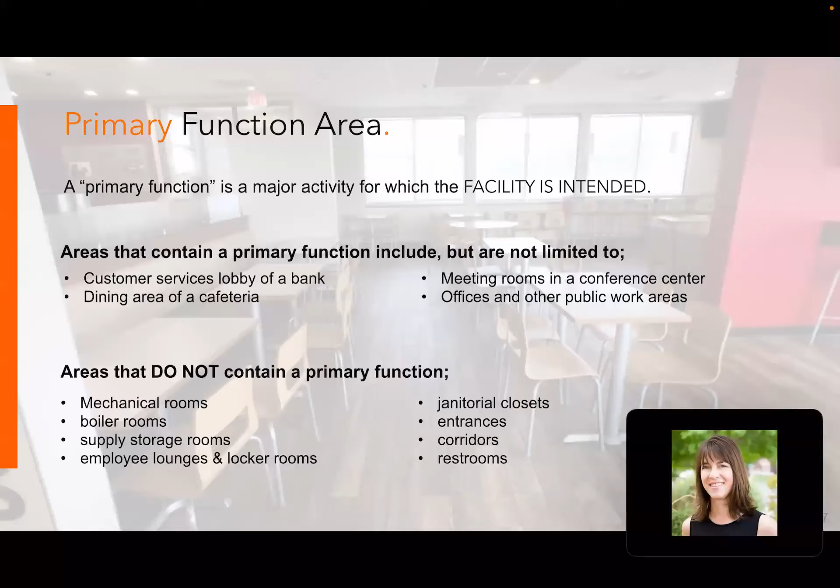So where does this kind of help come in? Path of travel or restrooms. What the standards tell us is that the path of travel to the altered area and restrooms, telephones, drinking fountains, etc., have to be brought into compliance in an alteration. But it's path of travel to the altered area and the restrooms.

But does that include the restrooms? Well, according to the Department of Justice, it does. So if you're doing an alteration to a space, you have to bring the path of travel to that altered area into compliance, as well as the restrooms that service that area.

But let's talk about a two-story department store, and we're doing alterations on the second floor. So we're required to bring the toilets into compliance that serve that area. If we've got toilets on the second floor, those are going to have to be brought into compliance, but maybe not the first floor restrooms because they service the first floor. So that's kind of the difference that we're looking at when we're talking about restrooms and path of travel to altered areas of a primary function area. Again, this all goes back to primary function area.

So what are we talking about here? The path of travel to the altered primary function area. That's going to first start at a bus stop, at the public right-of-way, at accessible parking spaces, to the entry to the building. So that's number one. Number two is the entry to the building. Number three, once we're in the building, that's going to be the path of travel to the primary function area that's altered, and then the toilet rooms that service that altered primary function area. So this is kind of an example of the order that we're going to apply those standards to.

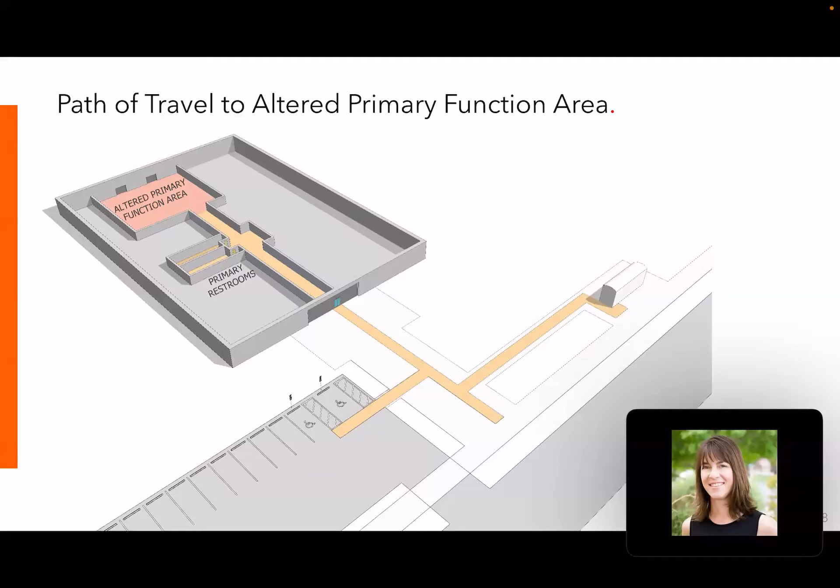So what is readily achievable? Readily achievable is easily accomplishable and able to be carried out without much difficulty or expense. So in determining whether something is readily achievable or not, we have a series of factors that we have to look at. But the Department of Justice threw one at us, which is the overall financial resources of any parent corporation or entity. So whereas a mom and pop store may not be able to afford to do something that would make it not readily achievable, a corporation like Walmart literally has the resources to tear a building down and build it back from the ground up. Not a good business decision, but as far as the financial resources, they have that.

So for a large corporation, readily achievable is a very high standard to meet, whereas a mom and pop have a very low standard to meet something that's not readily achievable. But the thing that somebody needs to keep in mind, if you can't afford to fix it, what makes you think you can afford the lawsuit? Because those lawsuits are going to come anyway. And even though it might cost $3,500 to tear out a curb ramp, and it's determined to not be readily achievable, it's probably going to cost you that plus much more to defend against that lawsuit. So that's something that owners need to keep in mind when they're taking a look at readily achievable.

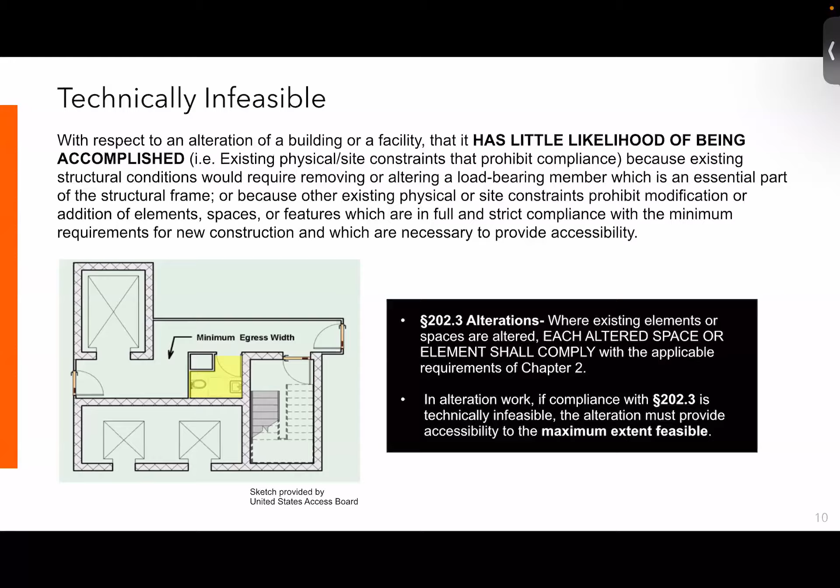And then alterations. We've kind of gone through this. All of these are alterations and how you apply the standards to alterations. But what is an alteration? I think as architects, we have a definition that we use as an alteration, but it's not necessarily what the ADA says an alteration is. An alteration under the ADA is something that affects or could affect the usability of the building, facility, or space.

So that could be changing out the flooring in a space, changing from carpet to a wood floor or wood floor to a carpet. That changes the usability of a space to a person with a disability because a person who uses a wheelchair has a harder time rolling across carpet than they do a hard surface floor. So that's the kind of usability that the ADA is talking about, not necessarily changing it from a conference room to an office or something like that.

So again, activities that could affect the usability: carpet, changing tile floor to carpet, changing out a water closet or a sink, restriping a parking lot could affect the usability. But what they're talking about when we're talking about restriping a parking lot is not necessarily the maintenance that you do to repaint the existing parking lines. This would be where maybe you've had to resurface the parking lot and you're relaying out the parking spaces. That is restriping a parking lot at that point in time.

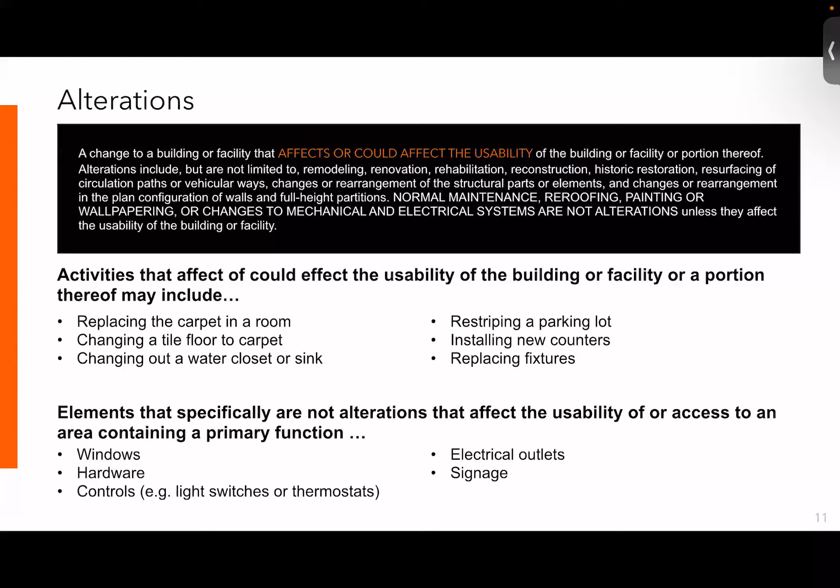And again, primary function area. We went through that a little bit more. So again, primary function area, what the facility is intended for, you have to make that analysis and determine whether something is a primary function area when you're doing an alteration for it. My advice would be always to err on the side of caution and look at it as a primary function area, but that's up to the owner to make that determination. It's up to the architect to help the owner make that determination.

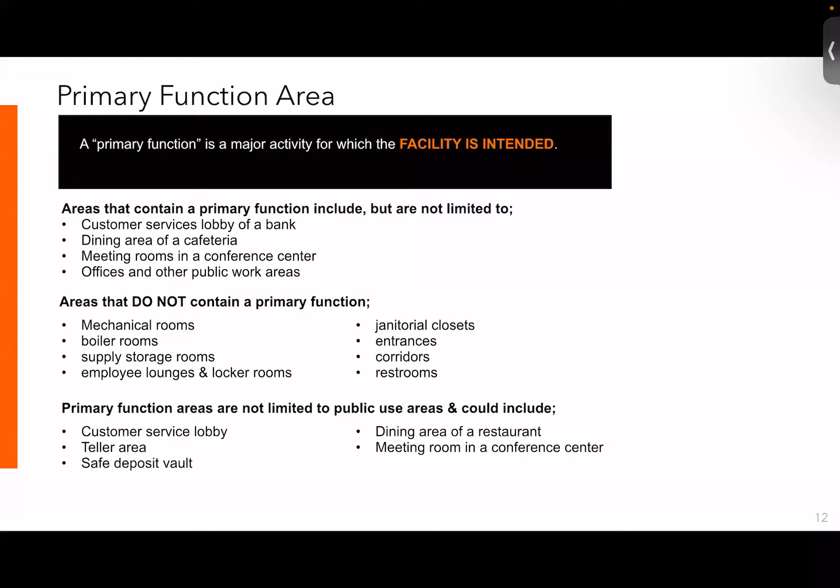So the next thing we want to talk about is disproportionality. So there's a concept in the ADA talking about when we're doing a renovation to a primary function area, we have to bring the path of travel to that primary function area into compliance, but only to the extent that the cost does not exceed 20% of the overall alteration to the primary function area.

So let's say we're going to do a $100,000 renovation. Let me get back to where we were there. Let's say we're going to do a $100,000 renovation. What this means is that we may have to spend an additional $20,000. So our total renovation cost is $120,000 to bring the primary path of travel and the toilet rooms into compliance as part of this renovation. What this means is that once you reach that 20% threshold as part of that renovation, you can stop.

However, that does not mean you do not have a continuing barrier removal obligation, that tomorrow you don't still need to remove barriers. So it's kind of a give and take area where, yeah, I can stop, but I still have a barrier removal obligation. So you may want to consider the fact that it may be less expensive to go above that 20% and do it now than to wait and get caught in a lawsuit later because you've got a barrier and you haven't removed that barrier.

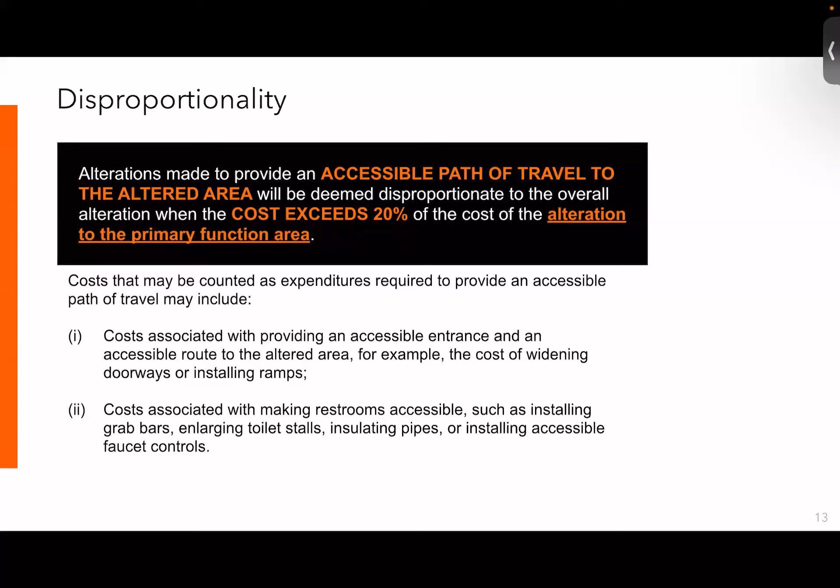So now some really meaty stuff here. Accessible routes. Let's get right down into the nitty-gritty of what the ADA requires. So where are accessible routes required? Site arrival points, at least one. We talked a little bit: public streets, transportation stops, accessible parking, accessible passenger loading zones. Within a site, between buildings on a site, electric vehicle charging stations on the site to the building, those are all places where accessible routes are required. And again, at least one.

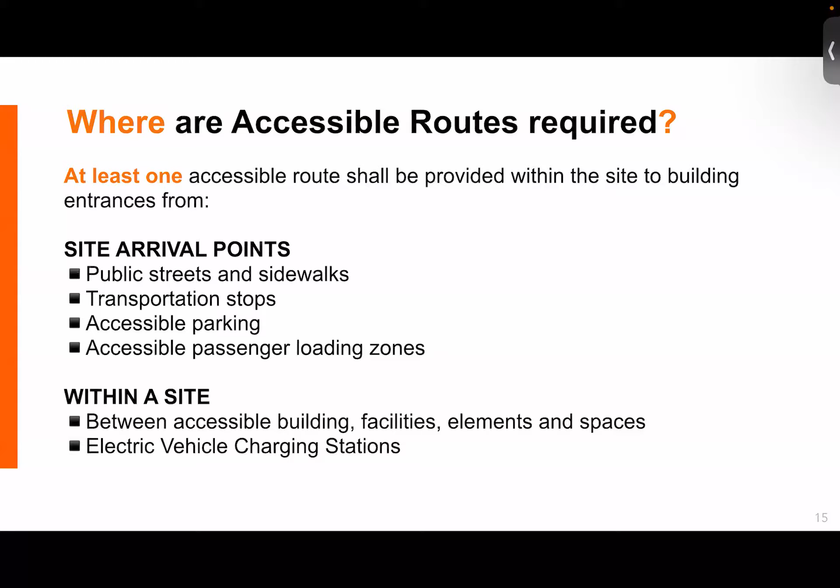And I cannot tell you how many new buildings that we are continuing to see built today where there is no accessible route provided from the accessible entrance to the public right-of-way. And there's actually two reasons why that is required, because the building code also requires that you have an accessible route as part of the exiting system from the building to the public right-of-way. Within a building, multi-story buildings.

Each story of a building has to be on an accessible route. But we do have an exception when the building is less than 3 stories. This is known as the elevator exemption. So as long as 3,000 square feet per story also. So buildings that are less than 3 stories, or buildings that have less than 3,000 square feet per story are not required to have accessible routes to all of the different stories.

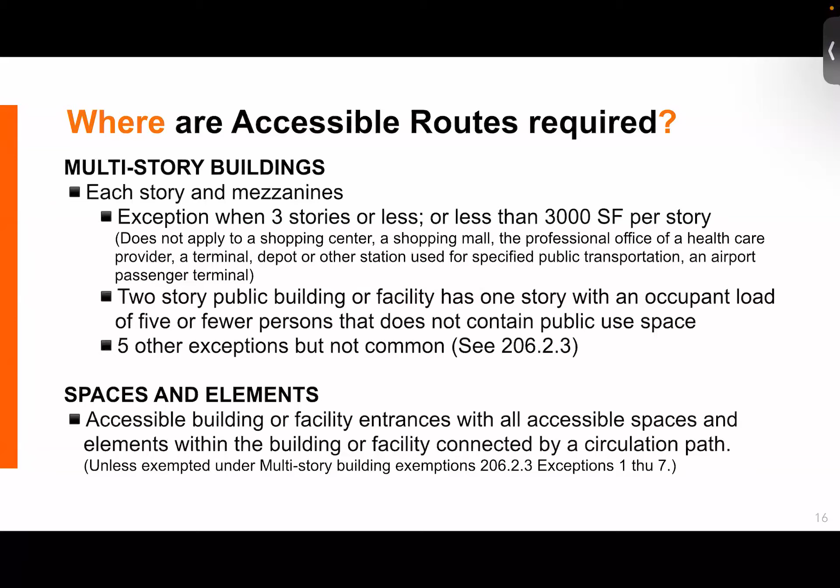And then spaces and elements within the building. Entrances to all accessible spaces have to be connected by a circulation path and an accessible route. And again, we go back to the multi-story building exemptions where that might not be a requirement. Employee work areas. Well, under the ADA, common use circulation paths within employee work areas are required to be accessible, but there are exceptions.

Employee work areas that are less than 1,000 square feet. Common use circulation paths that are an integral component of work area equipment. And then common use circulation paths within exterior employee work areas. So those are the exceptions. Otherwise, you need to make your common use circulation paths within employee work areas accessible.

And then emergency exits, as I mentioned earlier, from the exit discharge to the public right-of-way is a requirement because the ADA references back to the International Building Code, and in Chapter 10 of the International Building Code, that's a requirement. And then again, others in 206.2, not so common that we deal with all the time, but make sure that you pay attention to those.

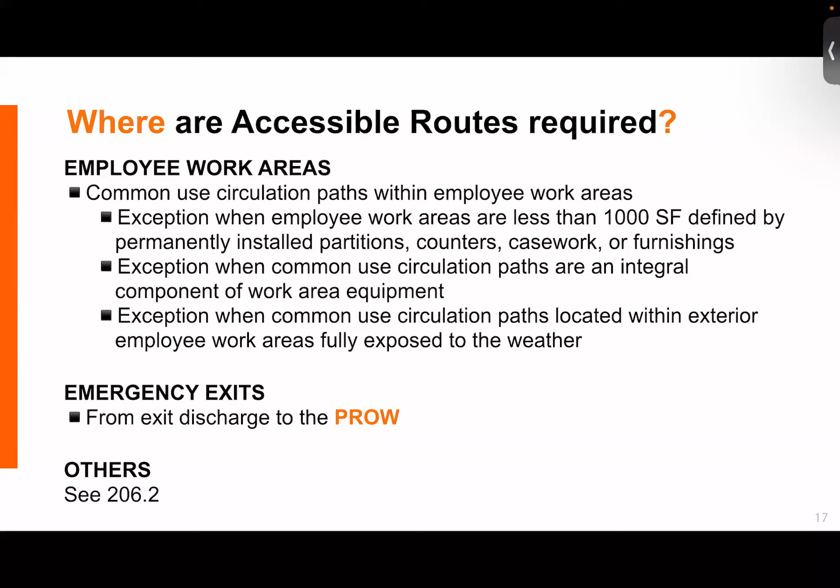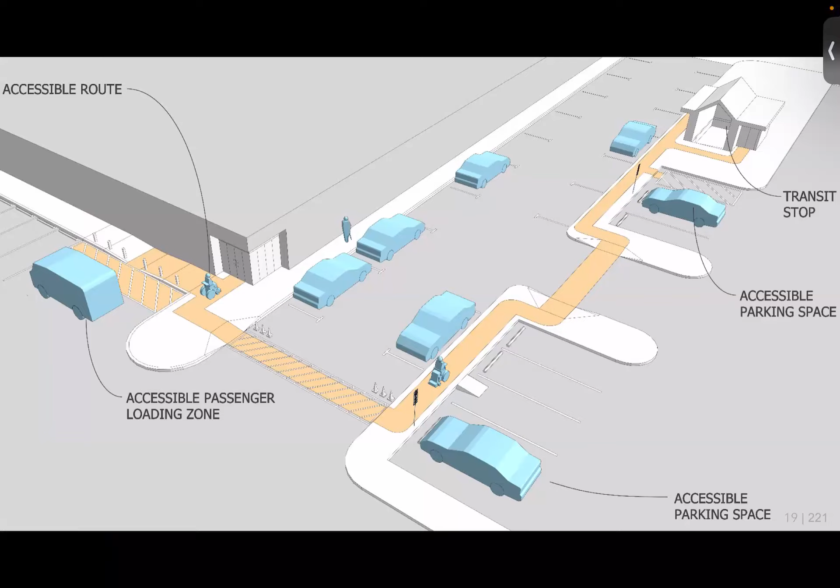But too often we see people trying to utilize this exception from a place that clearly could have pedestrian traffic. So it's best not to try to use it because it's a rare exception. So accessible routes, again, transit stops, accessible parking spaces, again, passenger loading zones to the building. And what's interesting is if you take a look at this sketch that is part of the Access Board's information, you will see that there are several things there that probably don't work, like the failure up near the transit stop. There's no curb ramp, so that parking space is actually not on an accessible route.

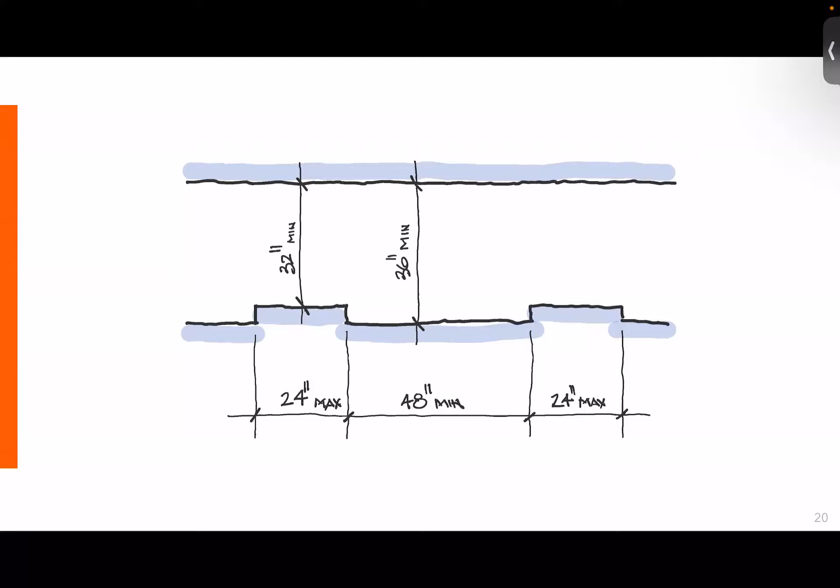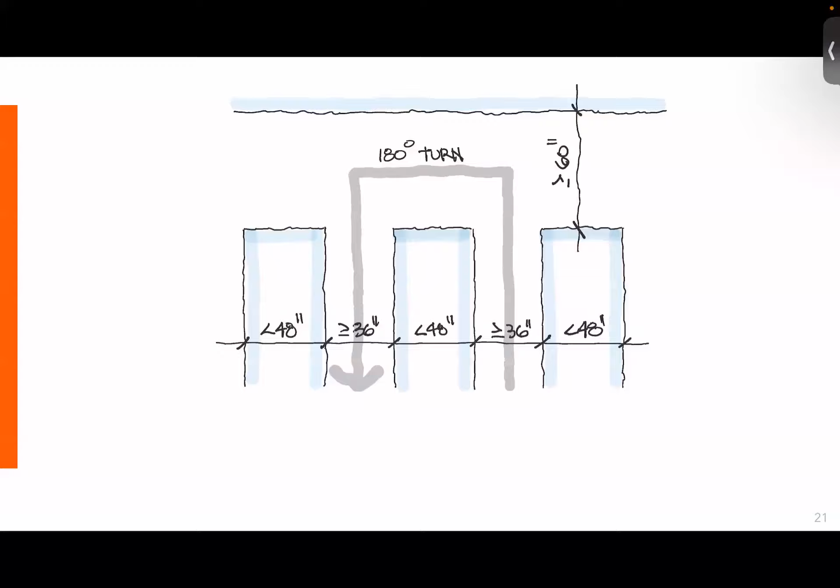So what is an accessible route? An accessible route is 36 inches minimum, with the exception that it can go down to 32 inches minimum for 24 inches max, as long as those reductions are at least 48 inches minimum apart. We also have 180-degree turns within an accessible route. So again, we have several options there. If the object that you're doing the turnaround is less than 48 inches, your accessible route has to be greater than 36 inches in width, as long as your turn itself is greater than 60. Or if it's less than 60 but greater than 48, then you have to have 42 inches.

But the question is, this kind of looks like something you might see in a retail store where you're going around the retail shelving. Is that a 180-degree turn? No, in our opinion, it is not. A 180-degree turn is where you are forced to make the 180-degree turn. In a retail store, we would not consider that to be a 180-degree turn because you can actually go the other direction. So it's really two 90-degree turns because you have maneuvering space where you can maneuver back and forth and then make the turn.

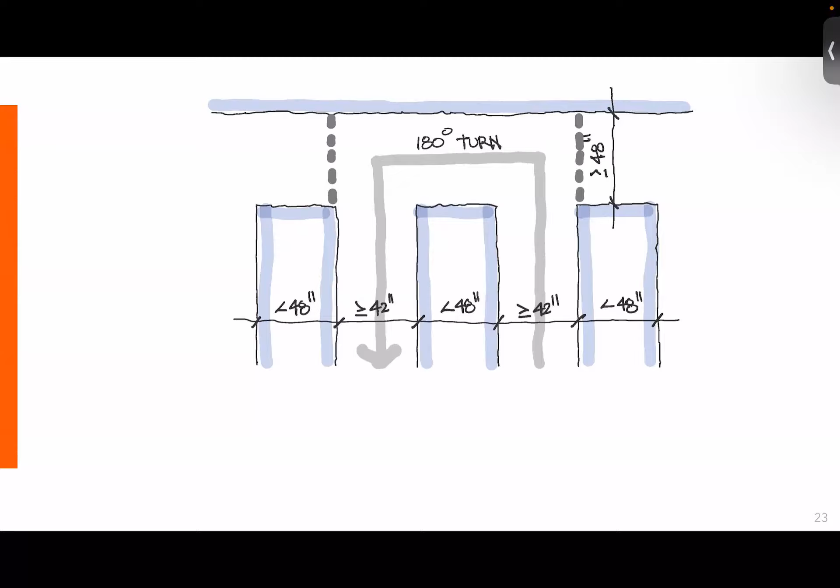So one last attempt at where are we going to have accessible routes. We're going to have them from public streets and sidewalks. So keep in mind, just because you don't have a sidewalk out in the public right of way does not mean you do not have to have an accessible route to the building. It says public streets and sidewalks. From the accessible parking spaces.

Now here's one. What about to the dumpster area? My opinion is that an accessible route to the dumpster area is not required. But the Department of Justice is on record as saying that they expect to see an accessible route to the dumpster area. So therefore, our recommendation is provide it. It probably doesn't cost anything to provide it as part of the construction of a new building. But if you get caught later, it can be extremely expensive to try to install that later.

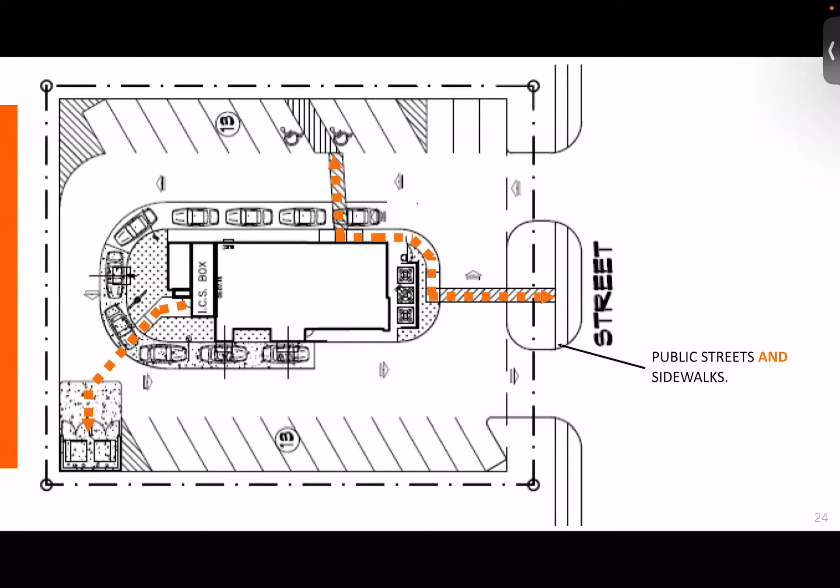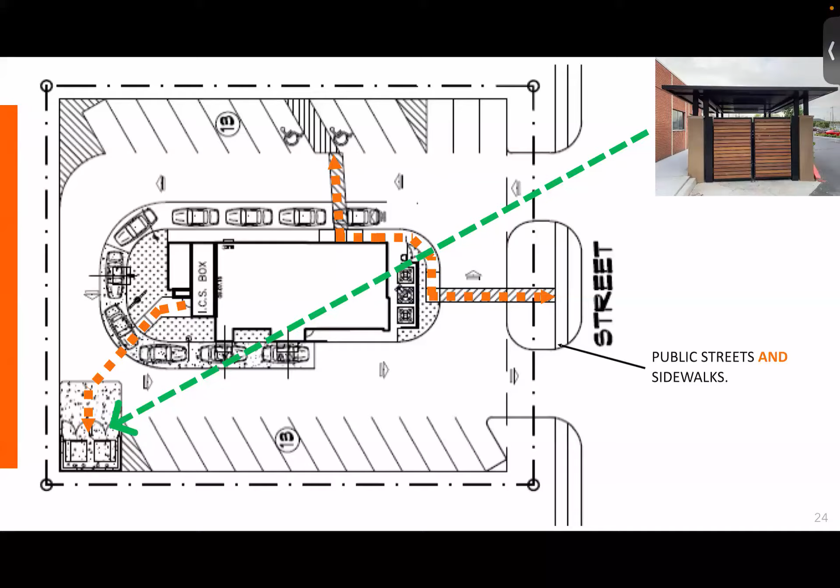And that is only an accessible route to the dumpster area. It doesn't mean that the dumpster area, the gates to the dumpster area, have to be accessible. You just have to have an accessible route out to that area. And here is the exception where an accessible route is definitely required to the dumpster area: when it has a covering over it, which we see some places, which is an attempt to keep water out of the dumpster area so that it doesn't take garbage and stuff carried out when it rains.

And as a matter of fact, there have been some studies that show marking those in drive aisles causes more people to be hit, not less. So the question is, does the paint protect people or not? And I guess the idea is that paint probably makes people think, oh, I've got a clear path here, I'm protected, when in reality they are not.

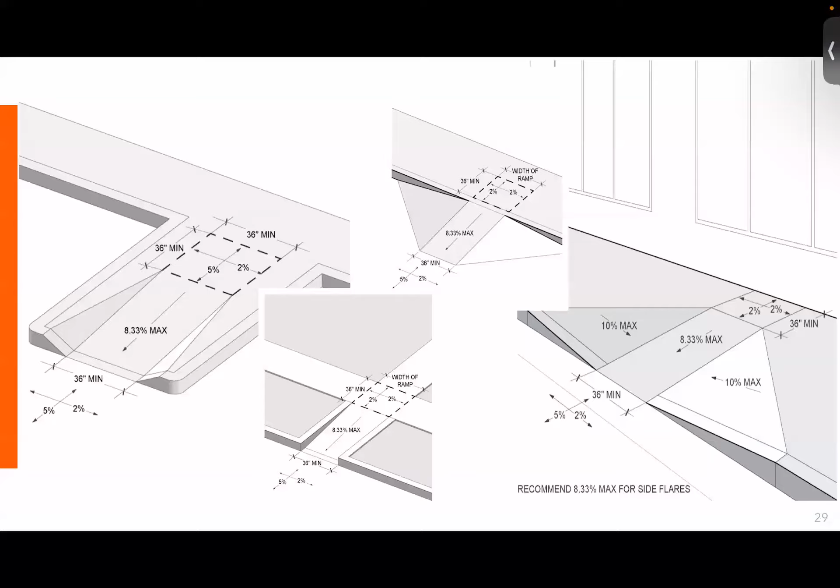Now we get into a curb ramp. There are lots of different things that make up a curb ramp. We won't go through all the different layouts of a curb ramp, but something we want to talk about is side flares. Under the ADA, side flares are not required on curb ramps unless a pedestrian can walk across the curb ramp. So in the second picture there on the bottom, obviously a pedestrian would not walk across that curb ramp, so side flares are not required. The one on the right, where it is in the middle of a sidewalk, pedestrians could walk across that, so therefore side flares would be required.

And again, we have opportunities to do curb ramps that are built up, built in. We can also have parallel curb ramps like the one in the upper portion there. Those are legitimate curb ramps as well. And those may be better in a lot of cases. So you can still use those. You just have to remember that you have to have a clear landing at the bottom that's level, and you have to have landings on the tops of the curb ramps that are level as well.

And the one on the far right we point out because oftentimes what we see is that the ramp will extend all the way down to that curved area. Well, the problem that you've got is that grade breaks at curb ramps need to be perpendicular to the path of travel. So you're going to have to break that curb ramp at that bottom edge and then have a level area out there that takes in that curb.

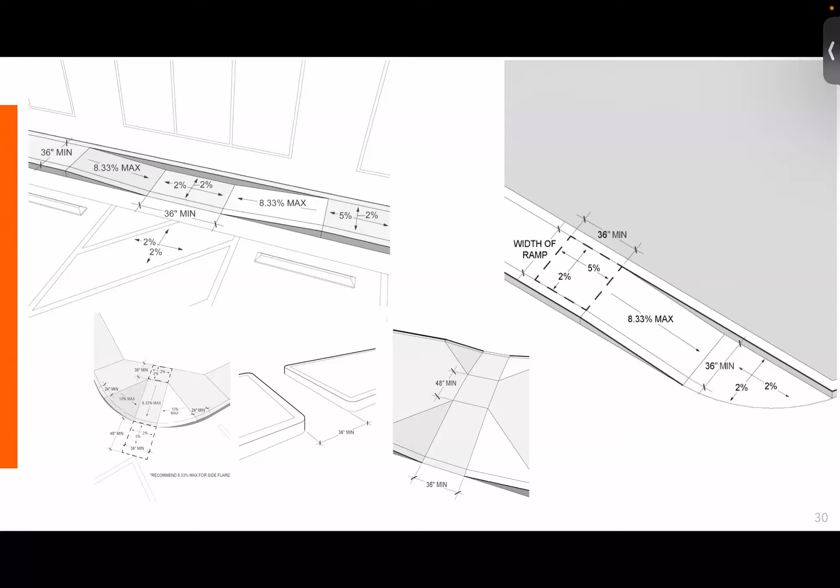So why do we see so many curb ramps that are too steep, not compliant? Are we as architects stupid and we design them wrong? I don't think so. Are contractors just bad at getting them built correctly? I don't think so. But we tend to think that we have a 6-inch curb, so a curb ramp has to be 6 feet minimum in length.

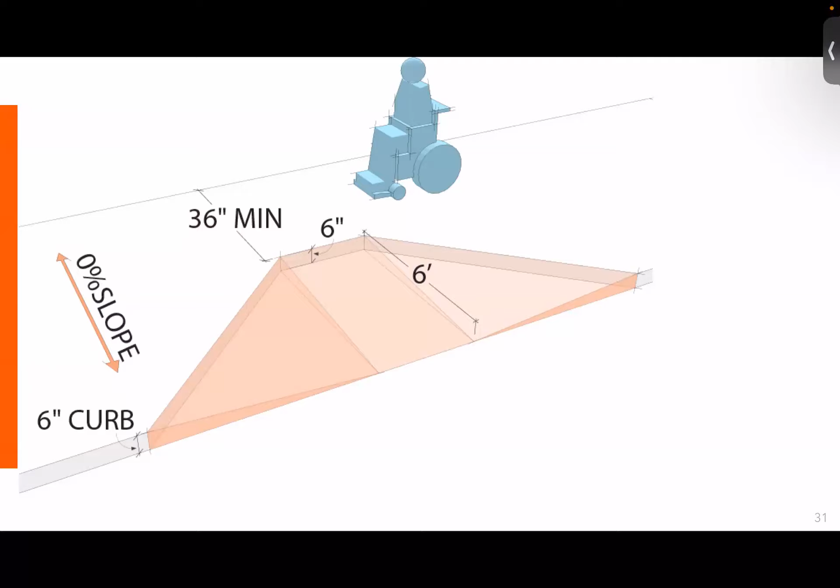That's great, as long as we have a 0% slope that we're building that in. But what in reality we usually have is a slope along that sidewalk of 2%, let's say. And if it's a 2% slope, we're actually chasing grade. So that curb ramp has to be almost 8 feet in length to maintain a 1 in 12 maximum slope. And then think about that 36-inch minimum that you have to have across the top of it there. Now that sidewalk has to be almost 11 feet in depth.

That is where I think most of the problems are caused, because the contractor goes out and builds a 6-foot curb ramp, but he matches it to the slope of the sidewalk, the cross slope of the sidewalk up there, and we end up with a curb ramp that therefore is too steep. This is just something that we're not properly considering, because it doesn't show up on a piece of paper well.

So Brad, we have a question. Yes. It says, are truncated domes required in curb ramps? We're going to talk about detectable warnings there. Under the ADA, detectable warnings are not required on private property, with the exception of train boarding platforms. That is the only place under the ADA that detectable warnings are required.

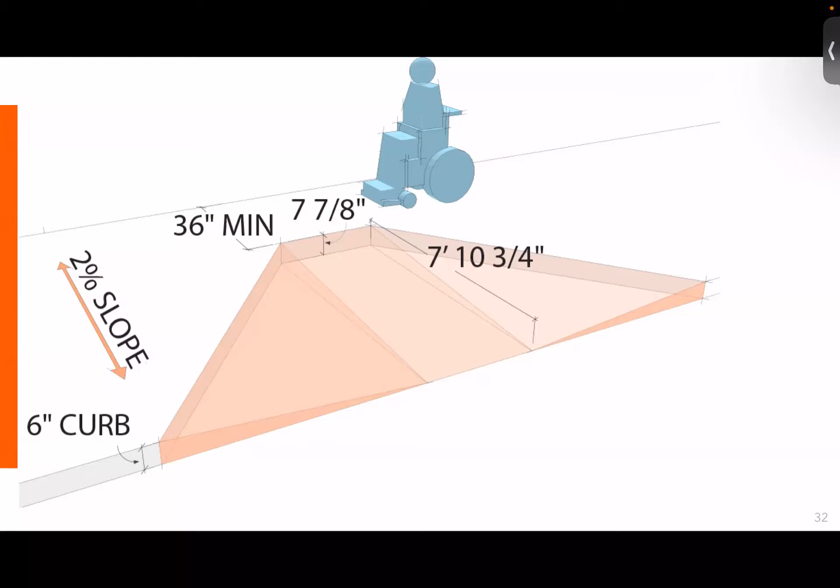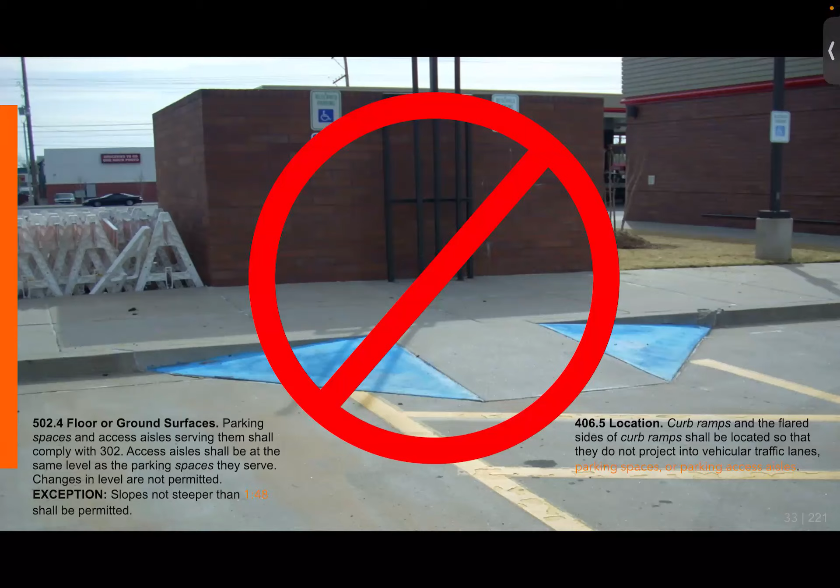So what's wrong with this curb ramp? It looks like it's sloped right. It's got side flares that look like they're okay, but this curb ramp is not compliant. Why is that? Well, there's actually two reasons. The first reason is that the ground surface of the access aisle and the parking spaces is required to be 2.1% max, 1 in 48. Once we put that curb ramp and those side flares in there, which extends into the parking space and the access aisle, is that not greater than 1 in 48?

Therefore, it's not compliant. The second reason is that it specifically states that curb ramps and flared sides of curb ramps shall be located such that they do not project into vehicular traffic lanes or parking spaces or parking access aisles. But we still see this being built today because we're missing those two reasons right there. So don't do this anymore.

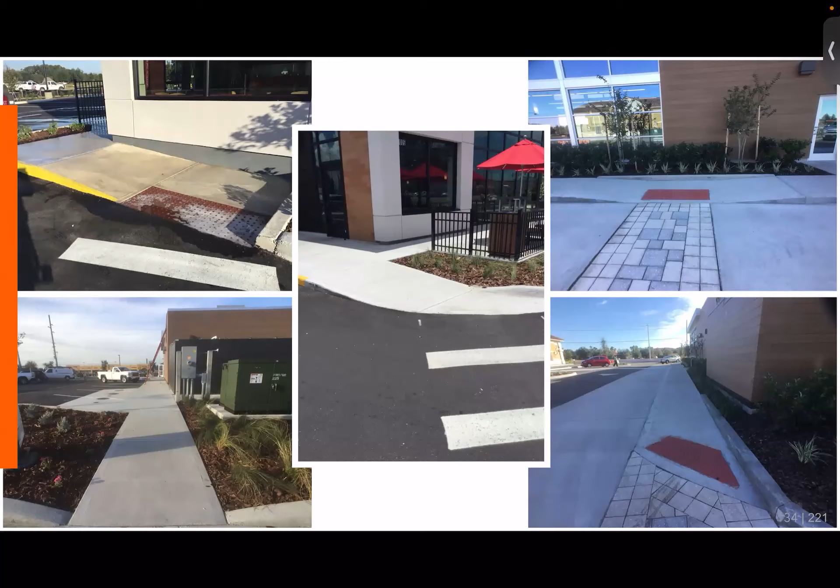So let's take a look at some examples of some curb ramps, some good, some bad. And as you can tell, these are being provided with detectable warnings, but it was not required, but they're still being placed there. So I would encourage people to think about that and not over install detectable warnings. They're maintenance issues. They can then become trip and fall hazards, which are much more expensive than ADA lawsuits. So that's something that we want to avoid.

Okay, so we see that picture in the middle. That is a pretty good example of how you put a curb ramp in, you do the grade break right there, and then you have that level surface at the bottom that's outside of the drive aisle. The one on the bottom right is a really bad example, because it doesn't have the level area at the bottom. The upper left is kind of a half parallel curb ramp. That's perfectly acceptable. The one in the upper right is a parallel curb ramp, but again, detectable warnings are not required.

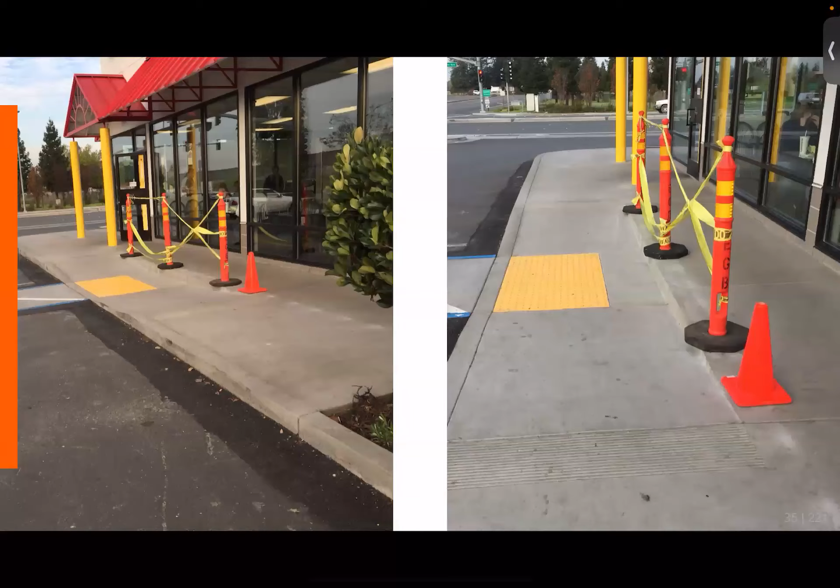Here's an example of a curb ramp. This one actually is in California, so the detectable warning was required in California. Everything is compliant, but it's a bad design. And I think we can see that there was a definite problem there because they put these warning cones up there.

One of two things happened here: a person walking down the sidewalk didn't catch the fact that you had that break in the grade there, and they twisted their ankle, or somebody walking across the crosswalk right there didn't see the step and tripped and went headfirst into the glass. We've seen this a lot, and then we've seen the solution trying to come back after the fact.

So we need to pay attention to safety aspects as well, even though the ADA itself is not necessarily a safety code. There are some things that we as architects need to pay attention to. So ramps, we talked about curb ramps, we talked about ramps. There is a very definite distinction between curb ramps and ramps. Curb ramps in no situations require handrails.

Ramps could require handrails. If the rise of a ramp is greater than 6 inches, you have to have handrails. Curb ramps could have a rise of 24 inches, and it doesn't require a handrail. So what is a curb ramp versus what is a ramp? A curb ramp is a ramp that cuts through a curb. A ramp does not cut through a curb. It's just that simple.

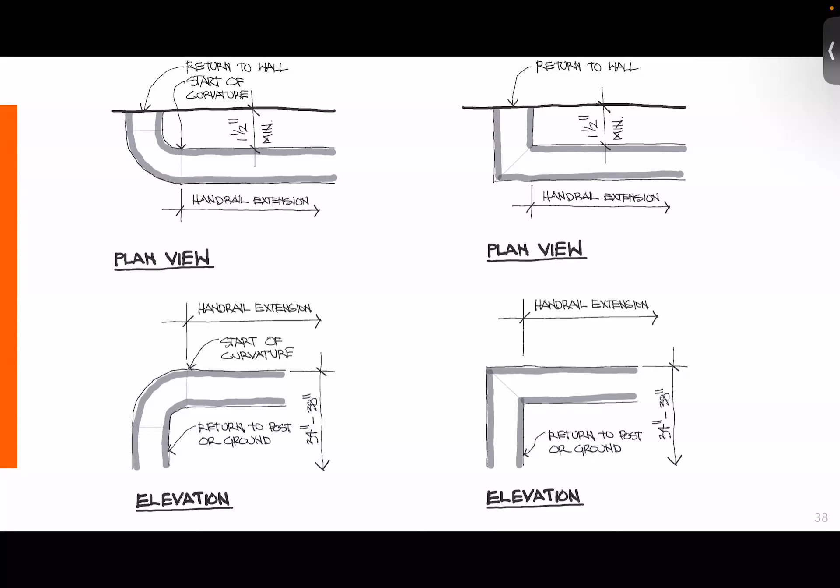So that actually makes that extension more than 12 inches in total length because of where you start measuring it from. And that's something that we see as a violation a lot. This is getting missed over and over and over again. So hopefully that might clue us in a little bit about when you're talking about whether it floated or not. It does have to return to a wall, the ground, or a post. And here is an example of both of these returning back to a post, and you're seeing that curved surface of where you're going to start measuring from.

So let's move on to doors here real quick. I'm not going to go through all the different variations of door approaches. You're going to have to look those up, but just keep in mind that there are variations, and you need to pay attention to how you approach the door. If you can get a forward approach or a front approach to that door, I might advise that you look at that, because a person who uses a wheelchair would most likely prefer a forward approach because it's much easier to use the door.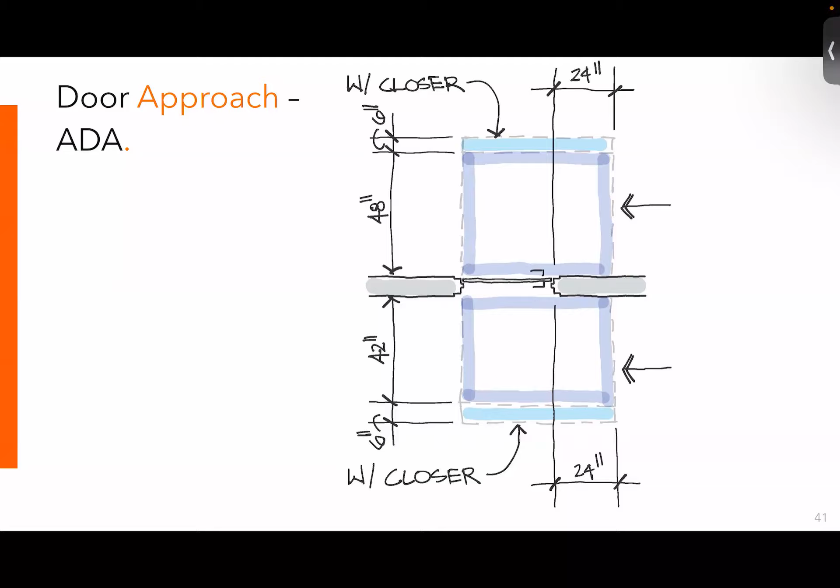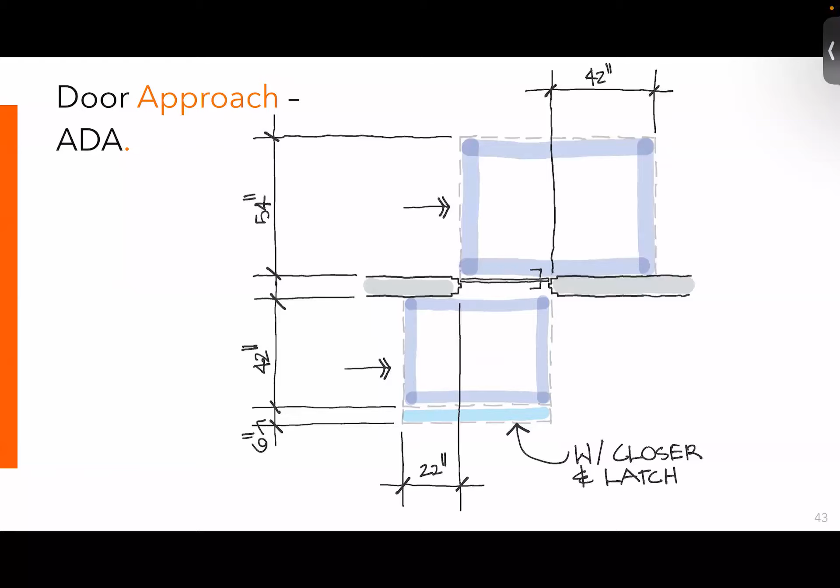But you might also want to think about using the predominant approach to that door. Is it a forward approach, a latch approach, or a hinge approach? That's a designer's choice. And you only have to have it from one side, not both sides or all three, but choose the predominant side. But again, with closers, without closers, changes the depth and the width; whether it's interior or exterior can change it as well for the latch side approach. Just keep in mind that you have different variations of that theme.

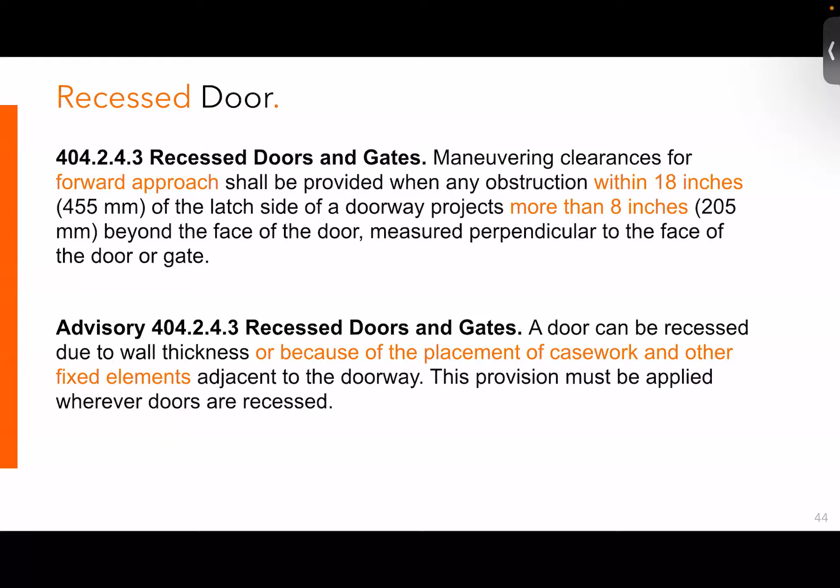The thing that we see missed a lot is recessed doors. So a recessed door or gate is required to have a forward approach if there's an obstruction within 18 inches that's more than 8 inches in depth. And you need to be paying attention, because casework or other fixed elements can also create a recessed door situation. So here's some examples of a recessed door.

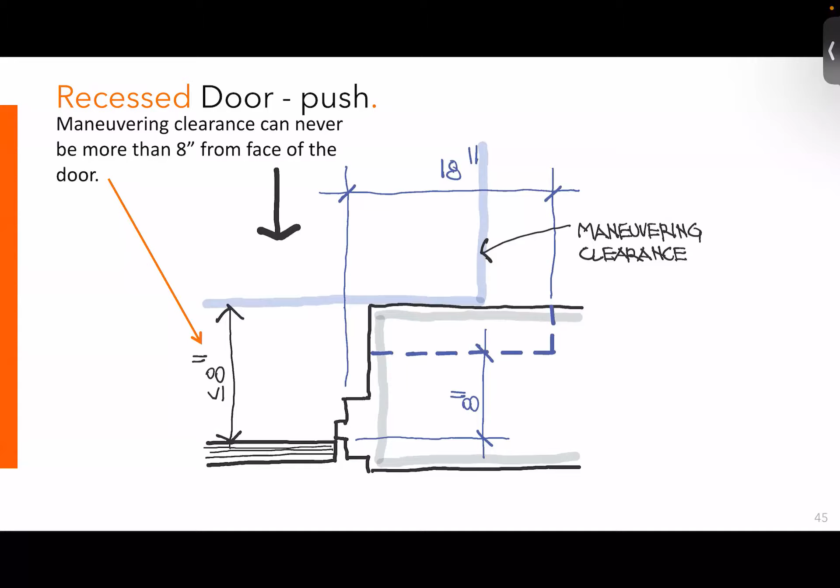And the best example that I can use is that if you determined what the door maneuvering clearance is, and it is greater than 8 inches from the face of the door because of some wall condition or fixture condition, then you've got a violation, period. That door maneuvering clearance needs to always be 8 inches or less from the face of the door. And if you can meet that condition, you really don't need to worry about recessed doors, with the exception of whether it's a forward approach or not.

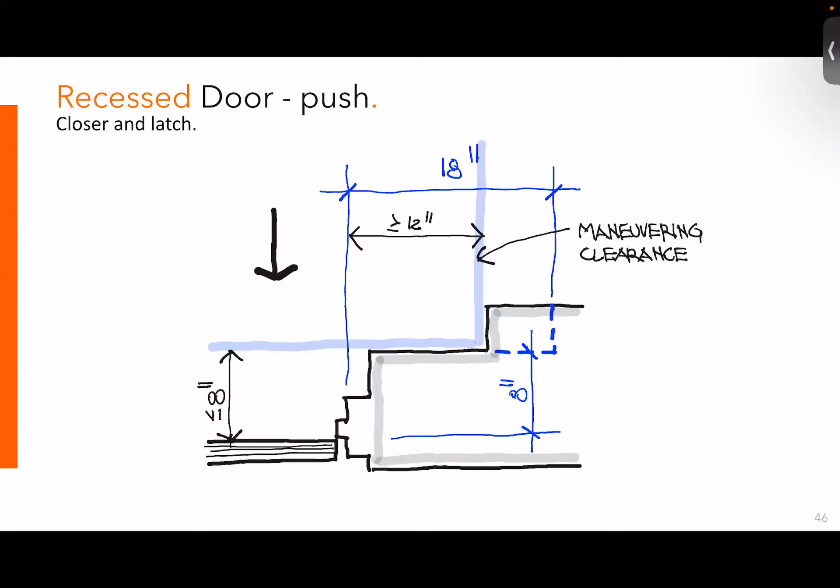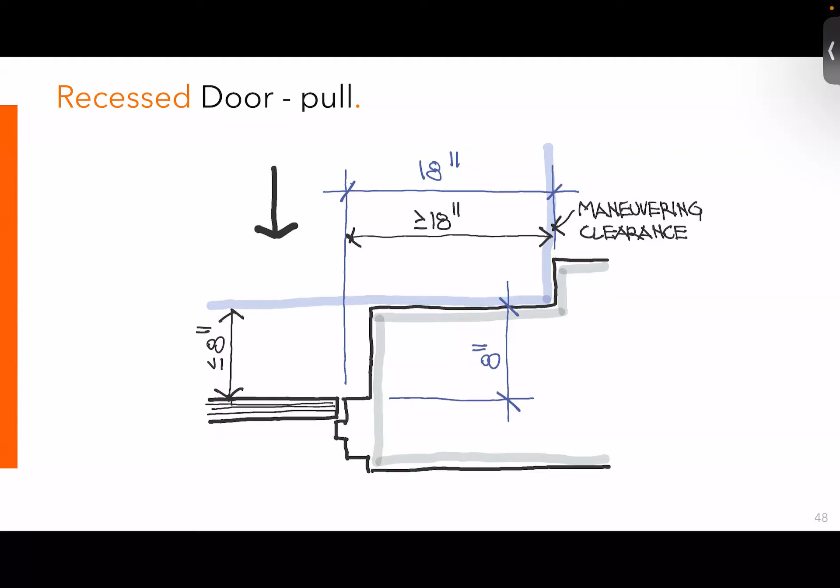So how do you fix it? You notch the wall. That's what we're talking about. Make sure that's always 8 inches or less. So then your maneuvering clearance will always be compliant and you don't have to worry about it. And pull side, push side, same thing. Just keep those all in mind. Maneuvering clearance, again, less than or equal to 8 inches. Then you don't have to try to determine whether it's a recessed door or not. It's just going to comply because you've got the proper maneuvering clearance at that door.

More examples. And then we talked about items that can create recessed door conditions, like a fire extinguisher, alarm pads on doors. Technically, a light switch could create that condition because that light switch sticks out a quarter of an inch. Luckily, everybody has some common sense, and we don't worry about light switches. But highly technically, it could create a recessed door condition.

Brad, we have a question. Yes. It says, if there is not a jamb, so the door swings either way, do the same rules apply? So we're talking about a double swing door here.

People would prefer a push door than a pull door because, again, they're usually much easier to use. So we always look at a double acting door as a push door. And so therefore it only has to meet one condition. It does not have to meet both the push and the pull. So we just look at it as a push door and have it comply with the push door condition.

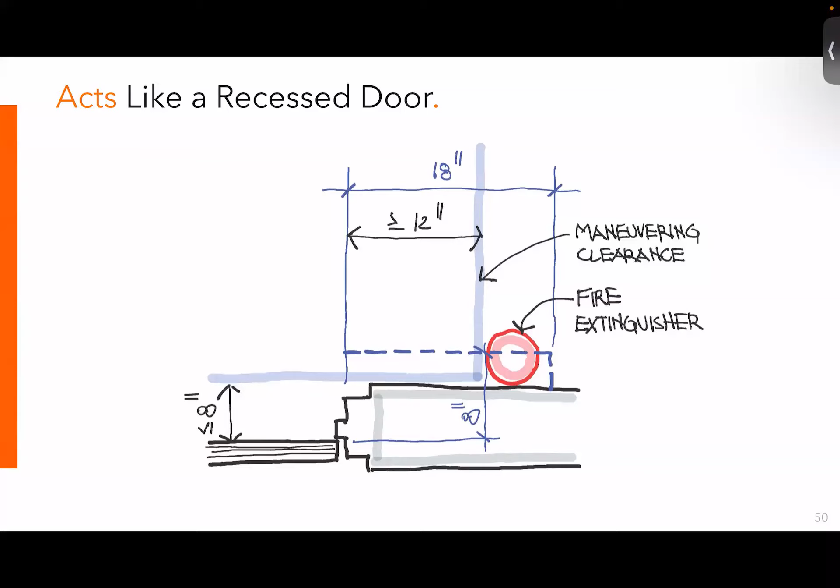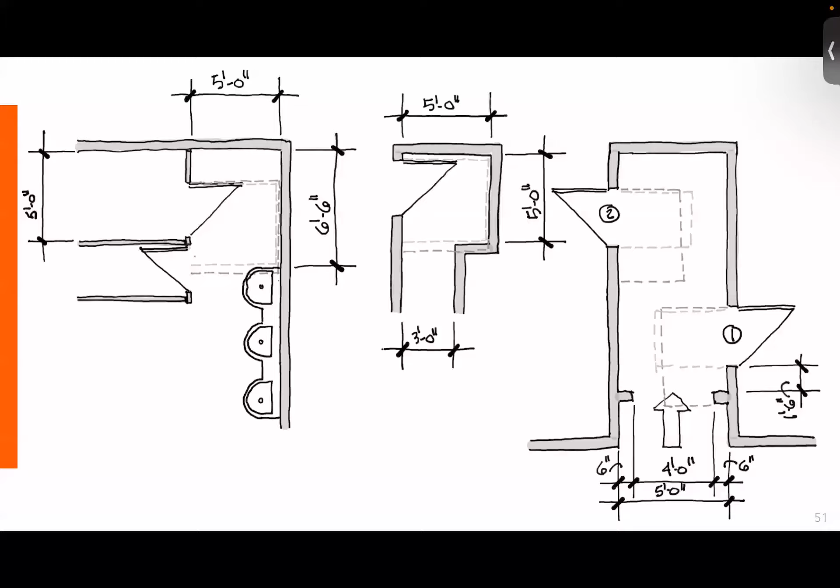And where that happens a lot is at toilet room doors where people want to use the towels to open the door, so they don't have to actually touch the door handle. So we have owners who actually put them there. Maybe as architects, we can design a solution so that doesn't become a problem there.

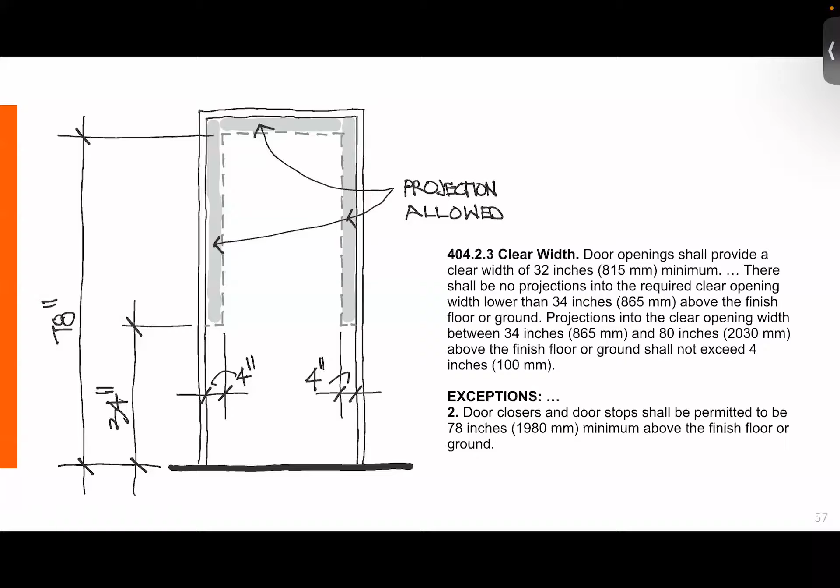And we have seen a lot of complaints over door closers and door stops, but this is the way that you defend against those complaints. Doors, and sorry, Brad, we have another question.

What is your opinion on having a recessed door in a historic renovation project where it is infeasible to meet code without damaging the historic structure? Punt. There are exceptions for historic buildings that you do not necessarily have to provide accessibility at that particular location if it is going to destroy the historic nature of the building or that element.

So that's something that you work with the historic preservation committee that's overseeing the historic aspects of the building as to what exactly you do. A lot of courthouses are historic courthouses. And so you end up putting the accessible route into that courthouse at the rear of the building so it doesn't destroy the historic nature of the front of the courthouse. So those are the kind of things that you do. You move it to a different location.

The other thing that we see a lot is automatic door openers used. There's a concept called equivalent facilitation. The idea is to provide the greatest amount of access possible. Automatic door openers and operators are not required in the standard, though a lot of people think they are. They do help get around requirements such as door opening force and maneuvering space clearances, because you just don't require the clearances if you have those type of elements.

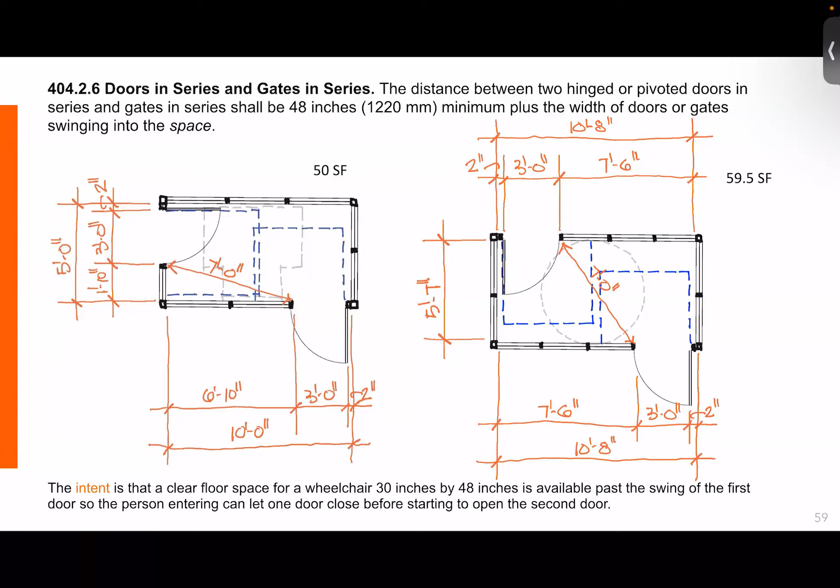So if we look at the left-hand vestibule, we could make a claim that that 7 feet is what is required right there, because now we have a 36-inch door plus 48 inches between the doors. We could look at the one on the right and same thing. We have a 7-foot distance there. I don't think that that is the proper way to do that, even though that's exactly what the language does say. I think this is the way we want to look at it.

If we have doors that are in alignment with each other, we open the door and then we have 48 inches. That makes the vestibule 7 feet in depth. If they're not in alignment with each other, we make sure that the door swing is 48 inches from the other door. So what we're actually doing is we're measuring the 7 feet from the hinge side of the door, not the latch side of the door. This is what we do, and this is how we check for enforcement.

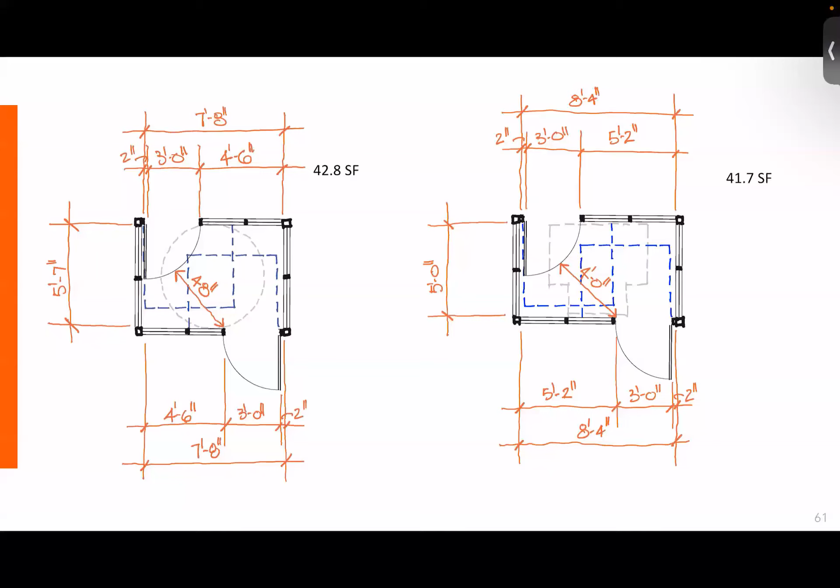And it does make the vestibules smaller. If you go back and you look at the other configurations, you'll see that the square footage of the vestibules actually does end up being smaller when you do it that way. So that's what we recommend. So that's kind of the end of doors. So if anybody has any more door questions, go ahead and throw them up there and we'll be happy to answer them.

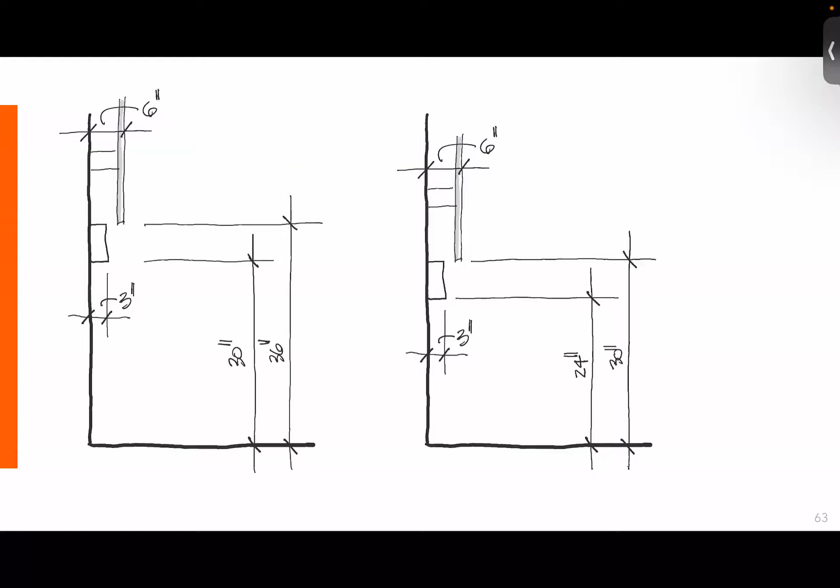Let's look at protruding objects real quick. So these are things that are missed out there. And the question is, what is a protruding object? A protruding object is anything that extends greater than 4 inches more than 27 inches above the floor. So how do you measure that? The one on the left is a protruding object because where you measure 27 inches above the floor, it extends greater than 4 inches. The one on the right would not be a protruding object, even though it's almost designed the exact same way, because when you go to 27 inches, it only extends out 3 inches. So you can see it's a very nuanced detail that you're looking at and how you measure those protruding objects.

Fire extinguishers within a building on columns could end up being a protruding object. Signs can become a protruding object. Shelving can become a protruding object. In stairwells, valves on sprinkler systems, sprinkler risers could become a protruding object. Drinking fountains can become protruding objects. And the point here is, protruding objects apply to circulation paths, not necessarily just accessible routes. Everything is a circulation path where you walk or maneuver.

Not every circulation path is an accessible route, but every accessible route is a circulation path. So protruding objects apply to circulation paths, which means every accessible route, but it goes beyond accessible route. Just because it's not an accessible route does not mean you don't have to pay attention to protruding objects.

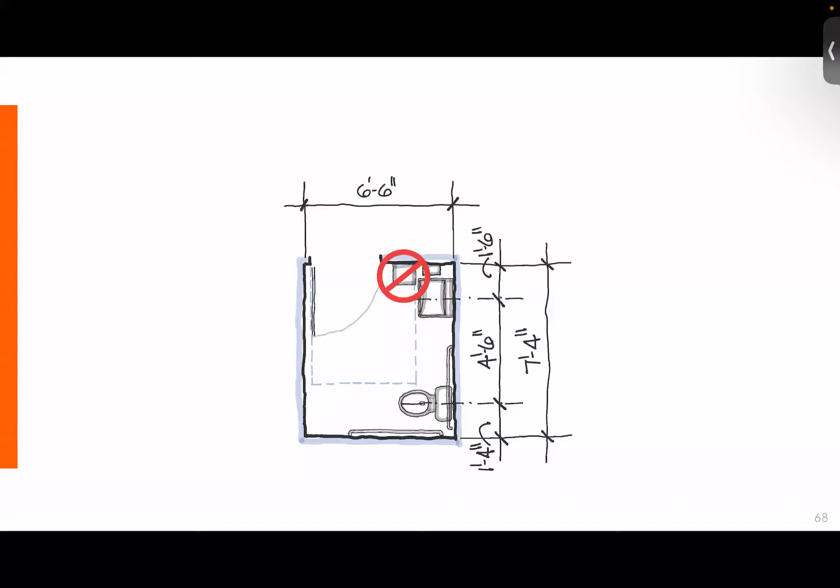But one of the things that we should all know is that turning spaces with a 60-inch diameter turning radius are required in toilet rooms. But what we forget is that we're allowed to use T-turns. And we never see T-turns used in design, but they actually can help make spaces smaller in properly designed spaces. So don't forget to use T-turns.

You can use T-turns. The one thing that I will tell you, under the new ANSI standards, I say new ANSI standards, they've been out since 2017. They're the newest ANSI standards, and we're now starting to see building codes adopt those because they were finally adopted in the 2021 IBC standards. Turning radiuses went from 60 inches to 67 inches, and T-turns became a little bigger as well. So you need to pay attention to that.

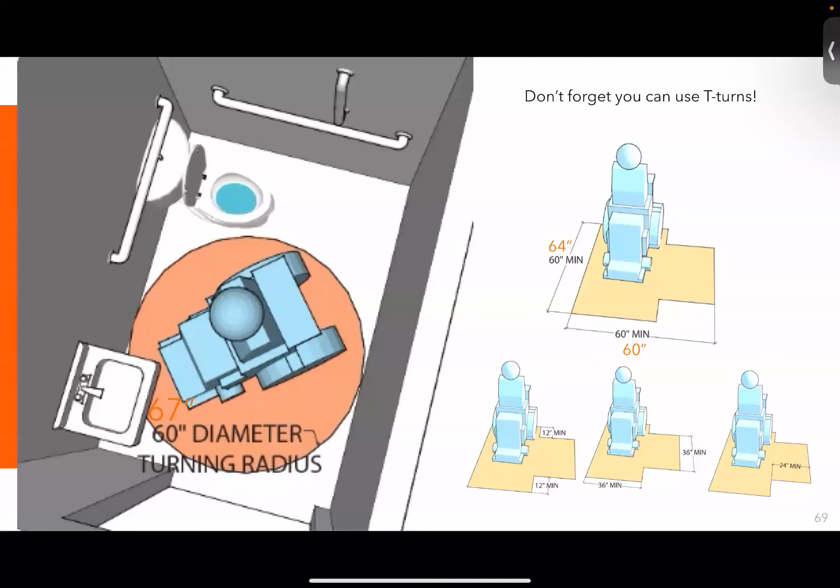But we did take a look at how does that change the size of a toilet room. And under the 2017 ANSI, we discovered that it really didn't impact the size of the room if you are using a T-turn as opposed to the 67-inch diameter turning space. If you use a 67-inch diameter turning space, that toilet room does get bigger.

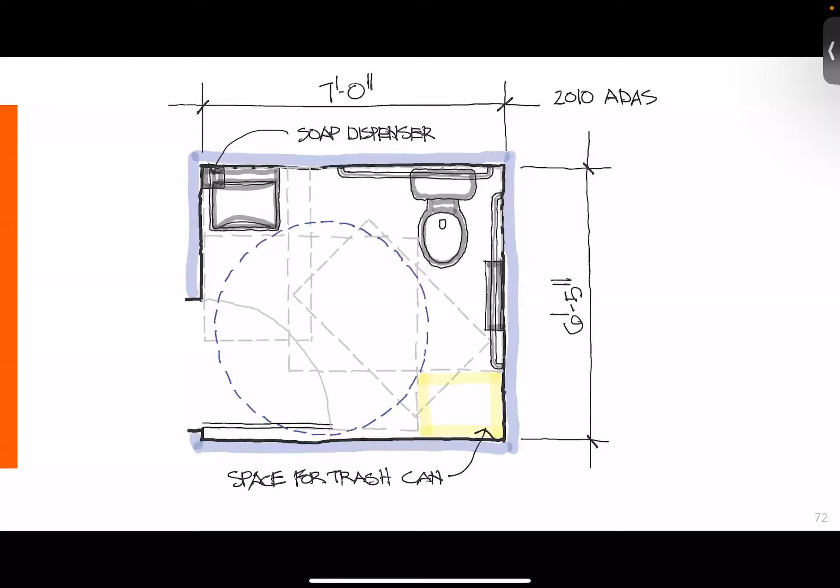Oh, Brad, we have a couple questions for this room. Yes. Okay. Says, we get asked to provide executive restrooms inside an office for a client's personal use. Do these also need to meet the accessibility standards? Clients often want to minimize the size of these as much as possible.

There is an exception for private toilet rooms accessed only through private offices. Essentially, they have to be adaptable. So you can't necessarily make them smaller because you still have to have the clear floor space for those. You don't have to have grab bars in them, but the lavatories have to be the correct heights, the water closets have to be at the correct heights, and the doors, whether you accommodate space within it, or you can reverse the swing of the door to swing out. So while there is an exception, it doesn't necessarily change the size of that space. That's what I would tell you, but there is an exception.

And then also, is it okay to have a protruding object like a sconce light above the toilet since it's not in a circulation path? Essentially, yes, because the water closet itself removes the circulation path. If it's on the sidewall, I might not have a problem with it. If it's on the back wall, technically it's still okay.

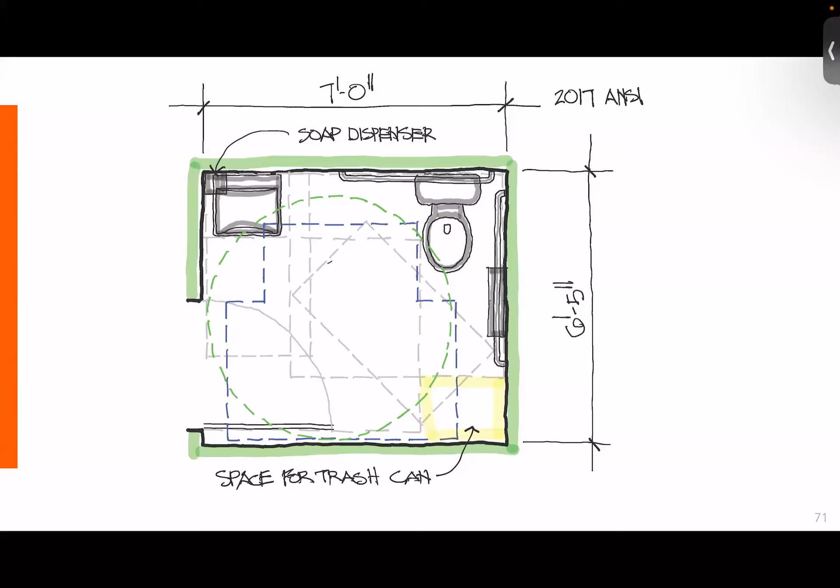So here are some layouts. I won't go through all the details on these, but you should go through these. We've tried to lay out where we think everything should be when you're looking at a toilet room. Best practices. For instance, grab bars have to be between 33 inches to 36 inches by the ADA standards to the top of the grab bar. That's the top of the grab bar, not the center line of the grab bar.

We recommend that the dimension on our drawings be 35 inches. That allows the contractor to be off a little bit and still be within that 36-inch height range. Also, if he misreads the plans and puts it 35 inches to the center line of the grab bar, because the grab bar is a 1.5 inch grab bar, he's still at 35 3/4 inches. So again, he's still less than 36 inches. This helps the contractor be successful.

We recommend using a 48-inch grab bar on the sidewall. The requirement is a 42-inch grab bar, but we recommend a 48-inch grab bar. And as you can see, we place it 8 inches off the rear wall. It has to be 12 inches or less, but it also has to extend 54 inches minimum. 12 plus 42 is 54. If you're using a 42-inch grab bar, that grab bar has to be placed perfectly to meet both of those requirements. With a 48-inch grab bar, you place it at 8 inches. Now you're at 56 inches. So you're giving the contractor better opportunity to be compliant.

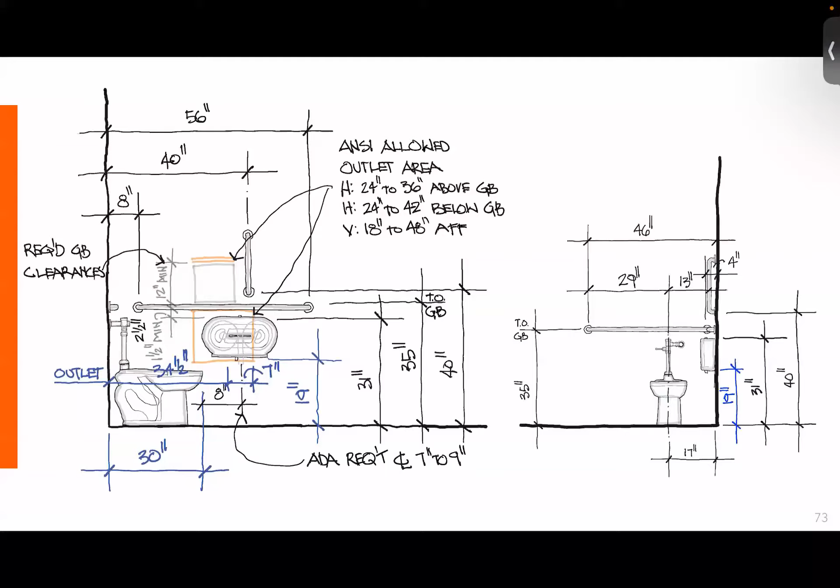Okay, let's talk about... Oh, yes, Brad. Got another question before you start on water closets.

How far can the door swing overlap the circulation turning circle or T? Under the ADA, there is no maximum distance. The turning circle can go all the way up to the door, and the door can swing 36 inches over it. In California, there is a 12-inch maximum, but under the ADA and under the ANSI standards, there is no maximum. But keep in mind that under the ADA, a door cannot swing over any fixture clear floor spaces unless there is a 30 by 48 clear floor space outside of the swing of the door, which usually is pretty easy to get, but you just have to make sure that that's there. So again, ADA, no maximum. Under California, there is a 12-inch maximum.

Okay, another one. Is a vertical grab bar required? Under the ADA, a vertical grab bar is not required. That is an ANSI standard requirement. So keep in mind, as you're doing buildings, you may be under the requirements of both the ADA and the building code, which requires ANSI. Building departments do not enforce the ADA. They enforce their building code. They are enforcing ANSI. The ADA is a federal requirement, and it's enforced by the federal government or the courts.

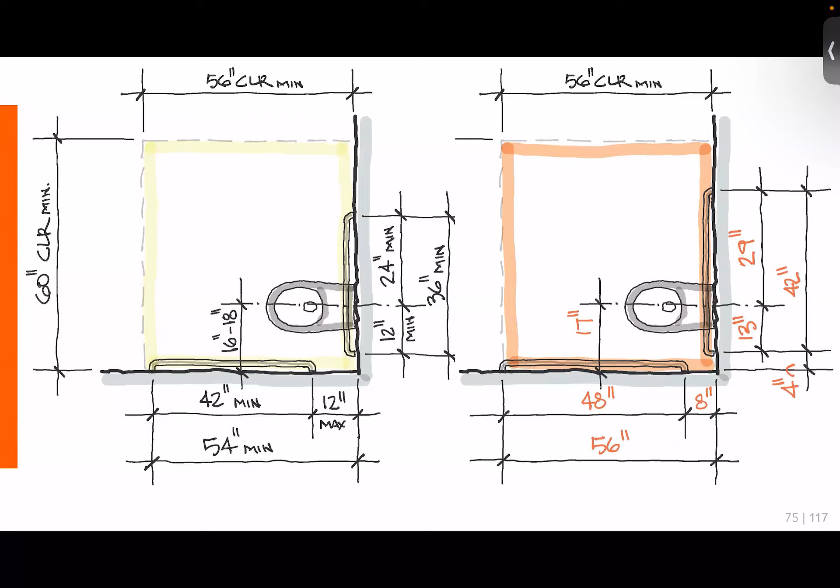Sidewalls, again, left is the requirement. On the right is our recommendation. The one thing I'll point out here is the seat cover dispenser that you see there. That's a good location for that. We see it placed on the wall above the grab bar, above the water closet itself. You can't get to it, so that is a violation. So you can either place it on that wall there, which works well, or you can place it on the sidewall as well, but not above the water closet.

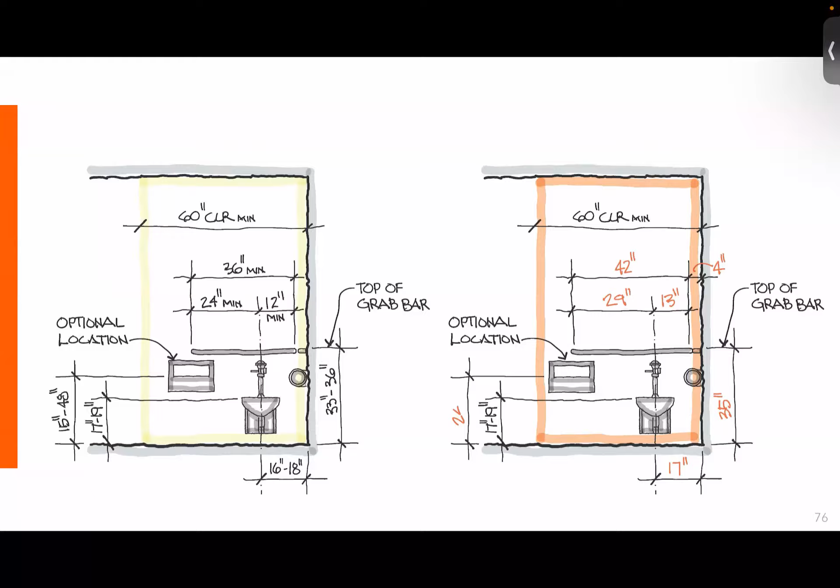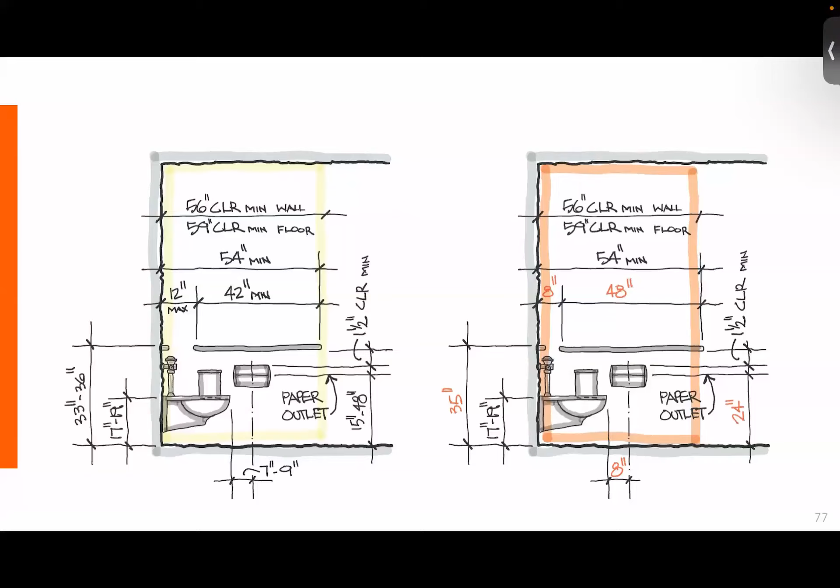Another example is the sanitary napkin disposal unit; that is the correct location for that. The ADA does not specify where it needs to go, but that's where you do want to place it. California actually says it has to be there, but that's a good location because it's reachable. The reason for the toilet paper dispenser being 7 to 9 inches in front of the water closet is because you don't want a person to have to reach out in front of them and fall off the water closet because they don't have balance. So you want it all within a good compact reach range right there.

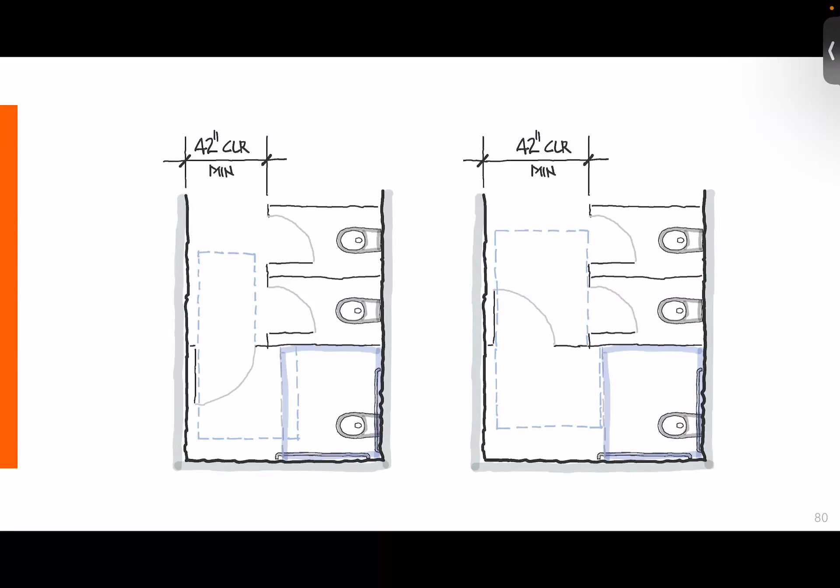Toilet compartments. Keep in mind, these are not toilet stalls, these are toilet compartments. If you want to be politically correct, stalls are for animals, compartments are for people. So you're required to have a path of travel to the door of 42 inches clear minimum. If the door swings in, you're good. If the door swings out, you're now required to have an 18-inch minimum clear floor space, so that space becomes wider. That's why most of the time doors do swing in. There are some state codes out there that do require the door to always swing out, so pay attention to that. Make sure that you keep fixtures and elements outside of the required clear floor space for the doors.

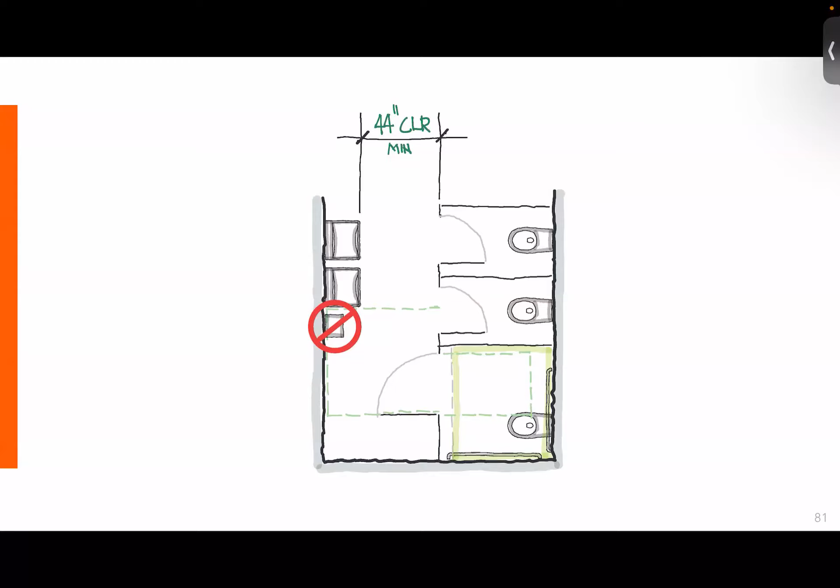This happens to be a California standard. California, instead of 42 inches, is 44. Why they think they need a little bit of extra room, I don't know, but the ADA is still 42 inches clear.

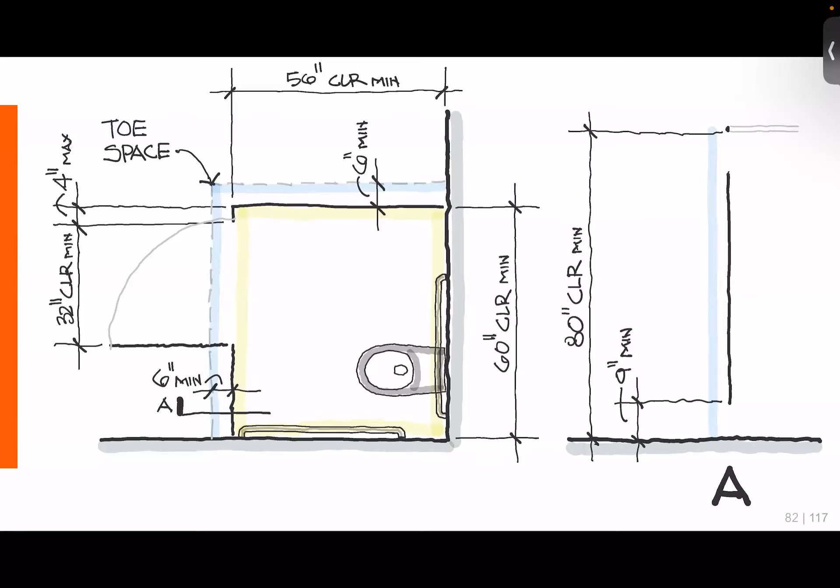You're required to have a minimum clear floor space on the inside of a toilet compartment, but you're also required to have a toe space underneath the partition that's 9 inches minimum and extends 6 inches at the front and one side. So when we start seeing toilet compartments that go all the way to the ground, you have to actually make your toilet compartments bigger. That 6 inches has to be incorporated on the inside of the toilet compartment. We see this missed a lot because it's in a slightly different section. So people make their toilet compartment the minimum size and they're missing the 6-inch toe clearance requirement.

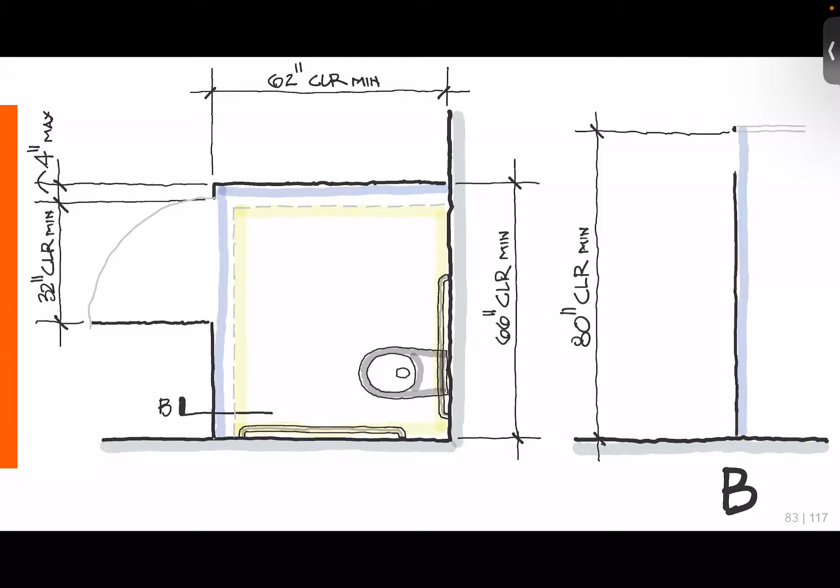So again, the door, if the door swings in, cannot overlap the required clear floor space of the water closet. That's so when you're at the end of the stall like that, swinging it in, the compartment has to get a little bigger probably. Again, floor mounted water closets versus wall mounted water closets, 56 to 59 inches.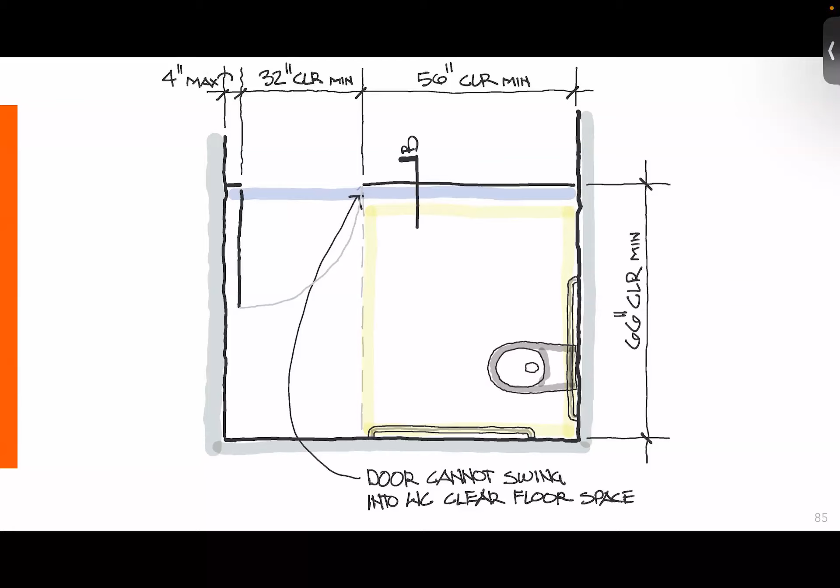Okay, Brad, I've got a couple questions if we can jump in. Yes, ma'am, please do. Okay. We do a lot of TIs. Can we take the existing building exception to reduce our turning radius? It's new space in an existing building. And PS, I like your old school sketches.

Okay. Under the ADA, there is no difference between existing and new. Under the ANSI standards, there is. Under the new ANSI standards, existing buildings fall under the old sizes and new buildings fall under the new standards. Okay, another one. This is a very fine point. If you look at the definition of a new building and existing building, and this is my attorney speak right here because I'm going to talk out of both sides of my mouth.

I would advise you to use the new standards if you have gutted the interior of that building. If you have not gutted the interior of the building, you are very definitely safe to use the existing building standards. But if you've gutted it, you really have a hard argument for why you couldn't use the larger standards. And it's my opinion that that's actually what the standards say, but that's not what most people believe.

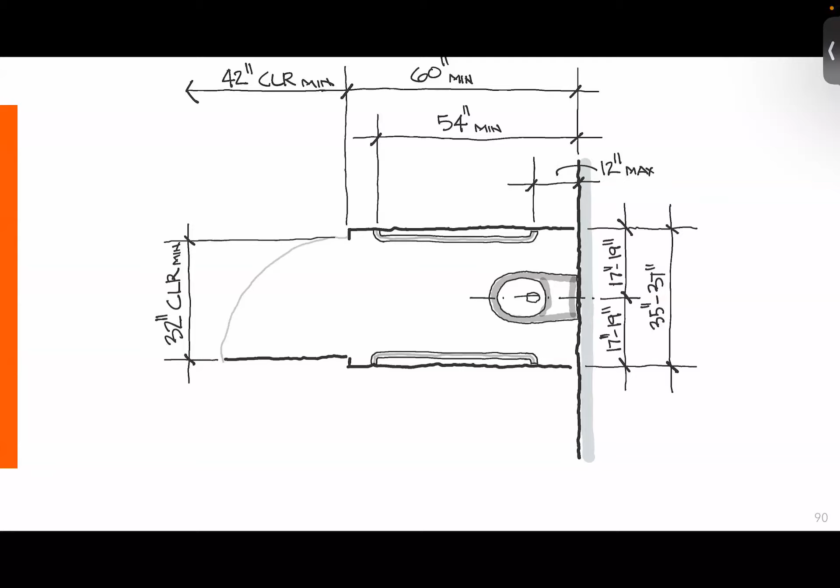Ambulatory compartments. Ambulatory compartments are required when you have 6 or more fixtures required. Not necessarily that you provide 6 fixtures, but when you are required to have 6 fixtures, then you have to have an ambulatory compartment. And they're a little different now than what they were in the old standards. So you need to pay attention to those.

The question that we always get asked is the water closet. Does it have to be 17 to 19 inches above the floor? Our opinion is that is not what is required, because in a toilet room, only one water closet is required to comply, and that better be the one that's in the accessible toilet compartment. So that complies. The ambulatory requirements do not reference the water closet section. It has its own section that tells you about the grab bars and so on and so forth.

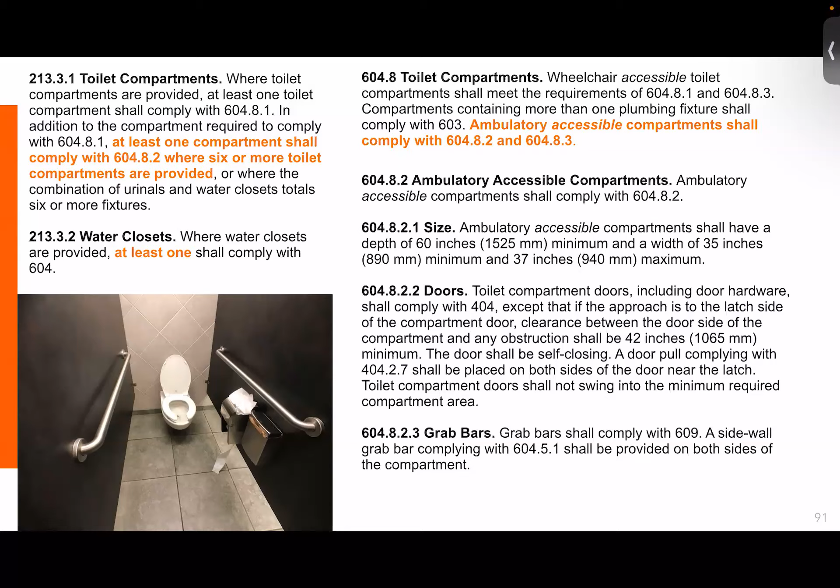Is it the right thing to do? You bet it is, because that's probably more than any place else where the 17 to 19 inches height is going to come in handy for a person who's trying to use that water closet. So should you? Yes. Is it a requirement? No, it is not.

Examples of an ambulatory water closet or toilet compartment with the water closet in it. So here's an example of where the toilet paper dispenser can be behind the water closet because you don't have all the requirements for the water closets. And the toilet paper dispenser in this location doesn't have the requirements because you're not going back to the water closet requirements, which is where the toilet paper dispenser requirements are located.

So again, different elements, but you do have to watch the coat hook because that is an accessible coat hook. It would have to be at 48 inches max. And that is a reach range issue, not a control issue.

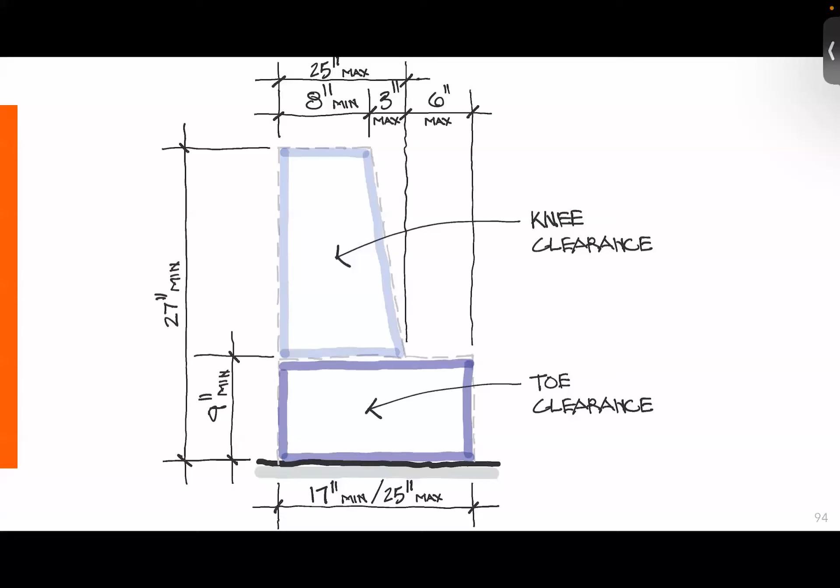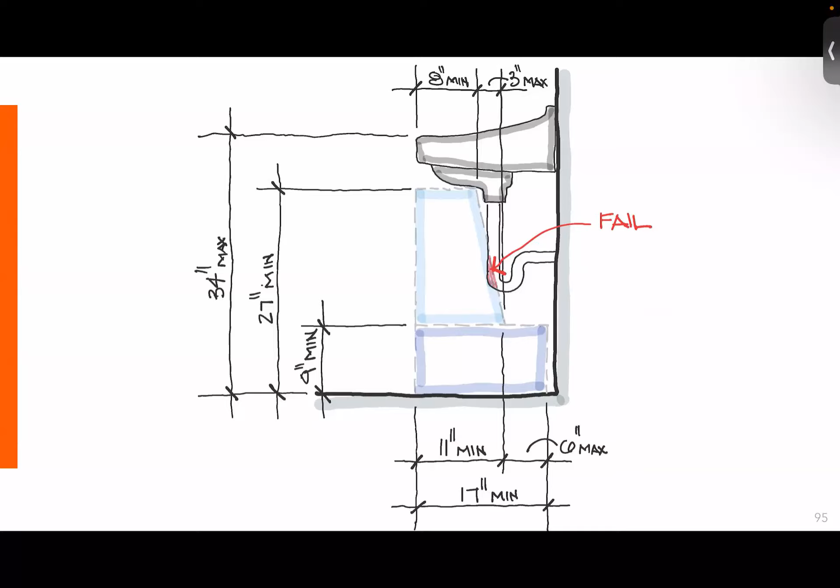Lavatories, knee and toe clearance are what we're primarily concerned with here. This is what the knee and toe clearance requirements are. This is what it looks like when you put it under a lavatory. This is what happens when you install the drain pipe. And as you can see, that interferes with the knee toe clearance. That is a failure. Every single time, that is a failure. That's the biggest problem that we have. So you need to pay attention to that.

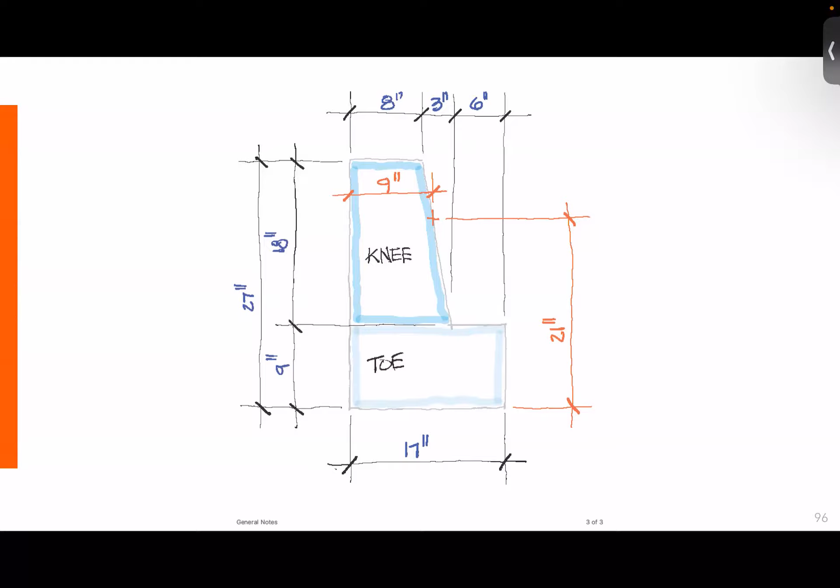There's several options to get away with that. Depending upon how far back the drain pipe is, will tell you how high that drain pipe needs to be. So if it's 9 inches back, it needs to be 21 inches above the floor to keep out of the knee and toe clearance. That's pure geometry is all that is. However, if you put an offset drain pipe in and you move the drain pipe to the back, that solves that problem every single time.

You just have to make sure that the contractor actually installs it correctly, because we've got a client that requires that in every location. And oftentimes the contractor, while he installs it, he extends it directly to the side so it doesn't move the drain pipe out of the clear floor space. So again, there's the offset for the clear floor space where you see it move back. It gets out of the knee toe clearance.

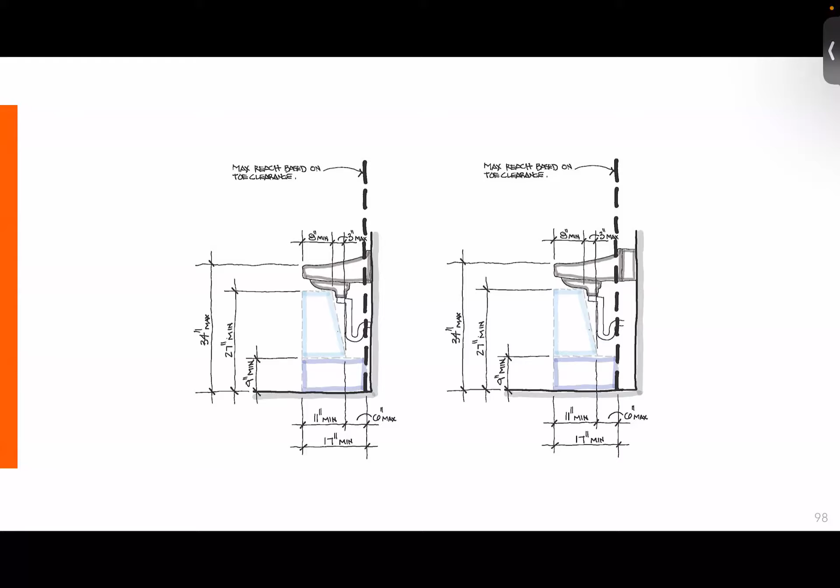Also, the other thing to pay attention to is that when you're reaching for the handles of your faucets, you cannot extend past the toe space. So while the reach range may say it could be 25 inches back, if you don't have 25 inches of toe space, you cannot do that. So you have to watch that to make sure that wherever your toe space ends, that your handles for your faucets are within that reach range.

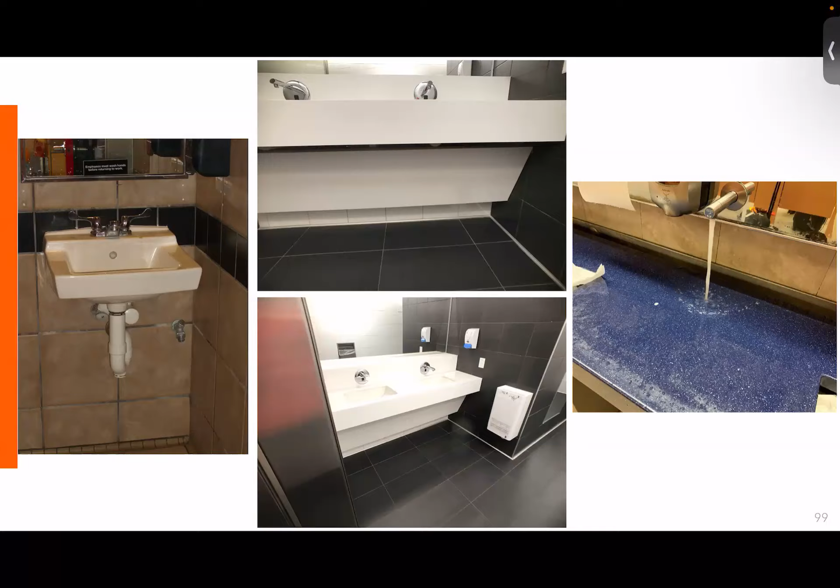And then we have to talk about covering the pipes or whatever. A lot of people think that's insulation and they only put it on the hot side. That's not correct. It is a protection against sharp objects. So you have to watch for other sharp objects that may be under lavatories, like perhaps that hose bib that's under there could be a sharp object, and maybe it ought to be covered as well. But just some examples of what we see out there. Again, you can put a shroud on, you can put coverings, all sorts of different ways to do that.

And again, if you're doing something where the lavatory itself is resting on a counter, keep in mind it's not the counter that's 34 inches maximum in height. It is the top edge of the lavatory that is 34 inches. And so that was a miss.

And our guess is that the architect designed one thing and the interior designer did something different, and it just failed to be coordinated. And the lower middle is, again, the shroud, but it was installed incorrectly by the contractor. Probably he couldn't get it installed correctly because of the drain pipe, and it just ended up not having the 8 inches deep at 27 inches high.

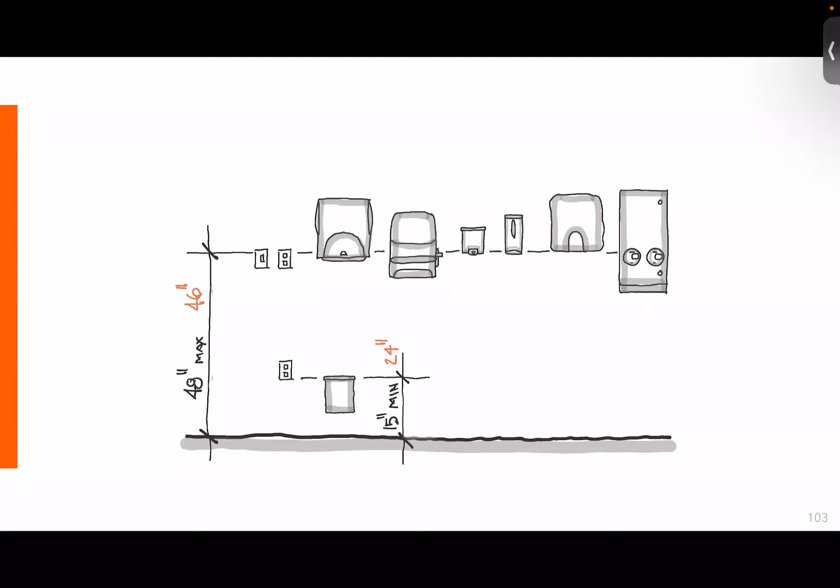Accessories, our recommendation is that you put them at 46 inches across the board, whereas 48 inches max to the operating point. And so you have to determine what the operating point is of each individual element. And then again, 15 inches minimum to whatever the operating point is. We would recommend 24 inches minimum, just to make sure that it's not all the way down on the floor. But whether it be a handle, the eye on an automatic dispenser of some kind, those all placed at the 48 inches max.

Other things you have to watch for: tight twisting, pinching, grasping for controls. Where you put soap dispensers and paper towel dispensers and hand dryers, they need to make sure that they're within reach ranges and have the proper clear floor space requirements there. Soap dispensers also have a 5-pound force operating on them, so you have to watch that. We had a 4-hour meeting one day over soap dispensers trying to find one that would meet the 5-pound requirement for a client. Let me tell you, those are not fun meetings.

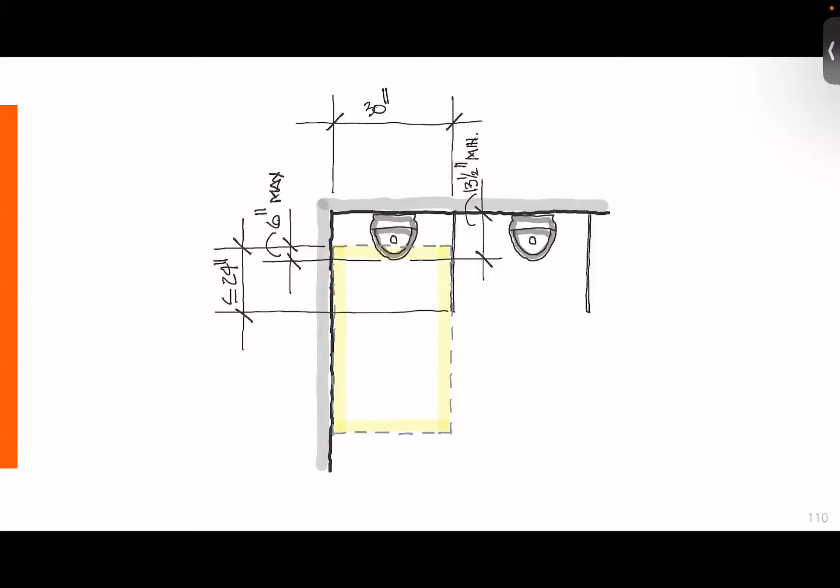So basically, you're going to see usually 18 inches in front of the urinal before it becomes an alcove condition, at which point then you have to go from 30 inches wide to 36 inches wide. So again, if it's less than 24 inches, it's 30 inches. If it's greater than 24 inches deep, it's 36 inches minimum in width. And it's always 17 inches max to the front edge of the urinal.

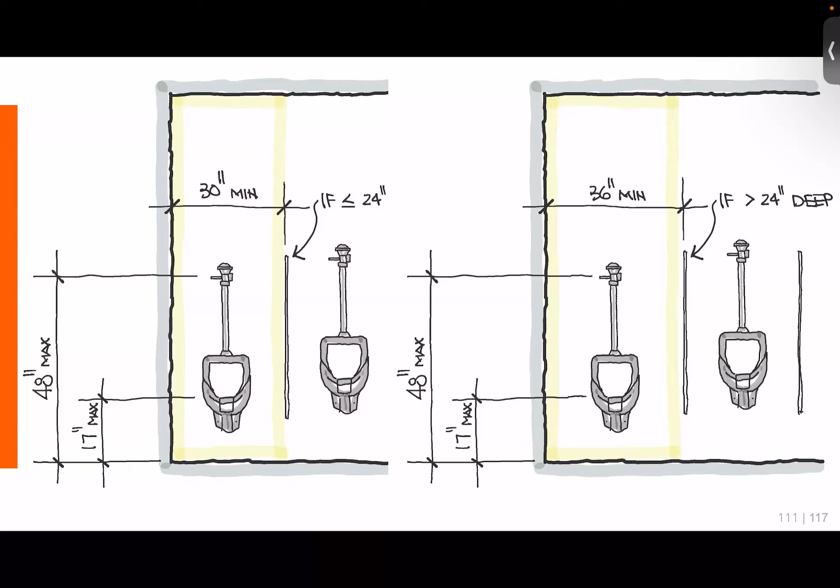And watch the flush valves, they're 48 inches max. California, 44, keep that in mind, 44. And then you always want to make sure that you have an elongated urinal, and it's 13.5 minimum from the back rear wall.

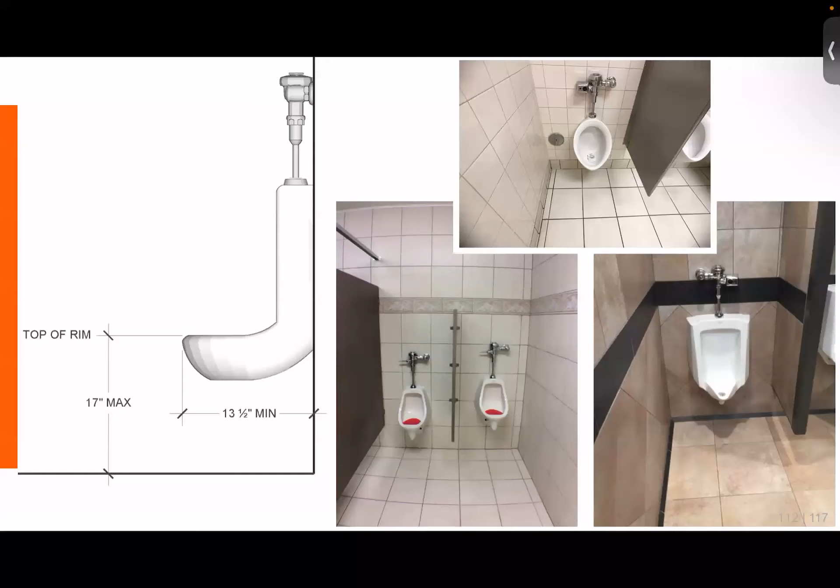Signage, coming down to the end here for signage, we're looking at signs are 48 inches to 60 inches max to the bottom of the lowest tactile character to the bottom of the highest tactile character. Braille is not a tactile character, so it's the raised characters that you put on there. The Braille can be lower than the 48 inches.

It's the tactile characters. And if you read carefully, you'll see that tactile characters are sort of defined in the standard as to what they are. So that's why Braille is not a tactile character, even though you read it in a tactile manner. Then you have to have the 18 inches minimum by 18 inches minimum clear floor space that the sign has to be centered in. That's 80 inches high minimum.

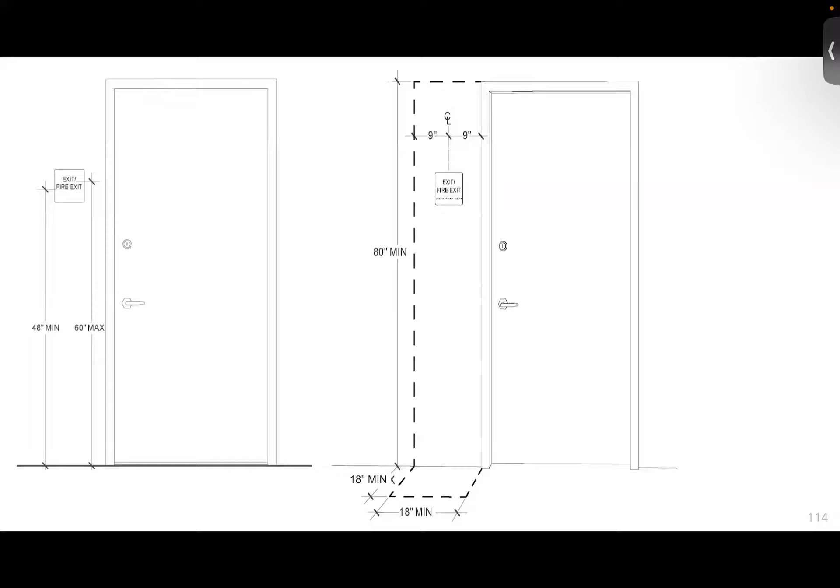Keep in mind that the idea is that that door cannot swing over that 18 inches. So if the door swings away from you, that 18 inches minimum can be over in front of the door a little bit. If the door swings towards you, it cannot. That's a little bit of a space saver, just so you know.

And then what kind of signs are we looking for? Raised letters. You have to have raised letters, tactile characters. You have to have Braille. You do not necessarily have to have the icons, but if you do, they have to comply with the standard.